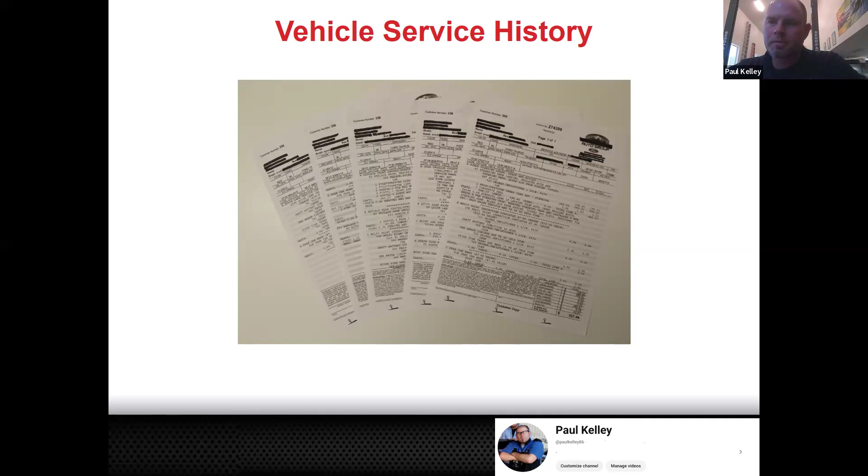Additionally, recalls are coming up right here, so I'll throw a recall point in. If you're bringing your car to the independent shop, the mobile mechanic, or doing it yourself, nobody's running that VIN number for recalls. But if you're bringing it to the dealership and there's a new recall, every time the car rolls through the service drive, the service advisor goes out and writes the VIN down.

They pull it up in dealer daily or service lane, and anything that applies to that vehicle as far as a recall or a campaign is going to pop up, and they're going to say, hey, while you're here, would you like to take care of this recall? You don't have to wait to get it in the mail, especially when you buy a car used. A lot of times that recall notice may go to the original owner, and people may be driving around with some safety related issue and not even know about it.

So this is all really positive reasons to stick with the dealership, because they're going to record all this stuff. They have access to this. Let's say you bring it to the dealership and they find that your oil pan is leaking.

Well, Jiffy Lube, Valvoline, no offense, you guys, I'm just going to keep picking on them, but I'm not picking on you, I'm picking on them, you know what I'm saying? Not us, it's them, those people at the Jiffy Lube and the Valvolines. But if they see that oil pan leaking, good chance they're just gonna be like, I don't know, we don't do oil pans here, and they're just gonna let it roll.

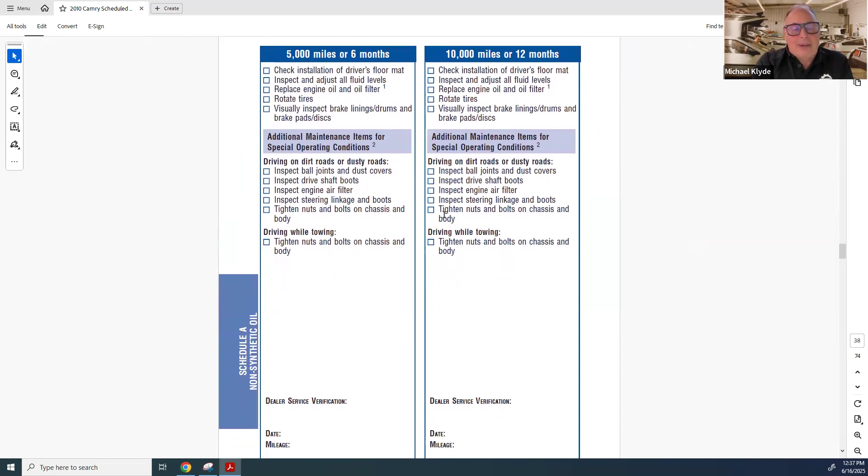So it tells you what you're supposed to do. In theory, at the dealer, you should be checking this off for a customer if this is in their glove box. So telling you as students that are going to be doing this at work on Toyotas or Lexus vehicles, if this book is in the glove box, then for that particular mileage, fill this out for the customer and leave it on the center console or passenger seat with a note saying, I filled this out for you, thank you for coming in to have your vehicle serviced at Anaheim Toyota or wherever you're working.

And that, I tell you what, if you want a customer to come back, fill this out and leave a little note in it and sign it, and I guarantee you that you're going to increase the chances of them coming back to get work done at your store by 100%.

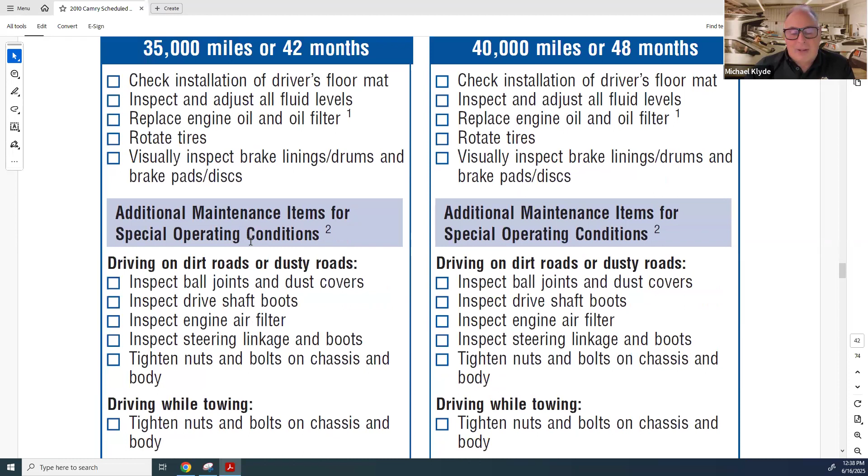Okay, yeah, they like this. The only thing I've heard is some customers don't want you going through their glove compartment. I think it's an amazing idea, but I'd check with the manager and ask, do I have access to, for example, the wheel lock that's in the glove compartment? A lot of dealers don't want you even looking for that, so they have the master set.

So anybody who's working, can you guys say if your dealer will have you go in the glove box, or if your dealer says don't even touch any personal stuff? Anybody got any feedback? Now's a good time.

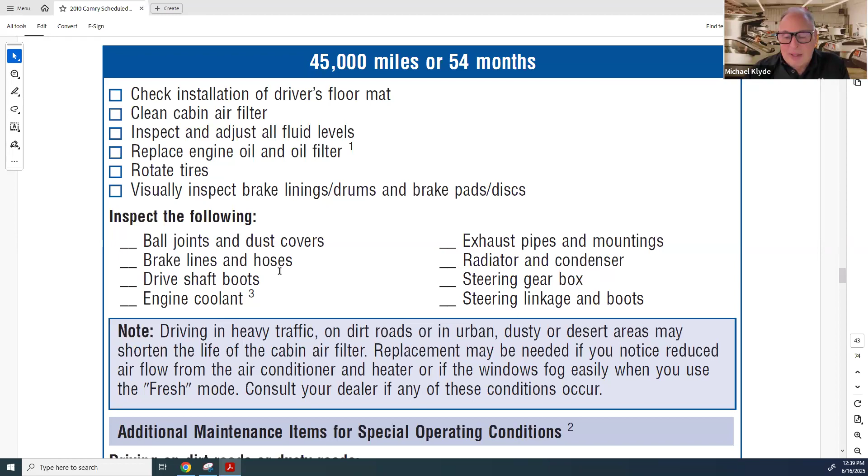And if your dealer does say that, you can always ask if you have a particular service advisor that does most of the maintenance write-ups. You can let them know on the days you're working, hey, remember I'm working today, so can you try to find the maintenance booklet out of the glove box with the customer so I can fill it out for them? Let them know why you're doing it, and that's going to increase the chances of them coming back for service, which is money in their pocket too.

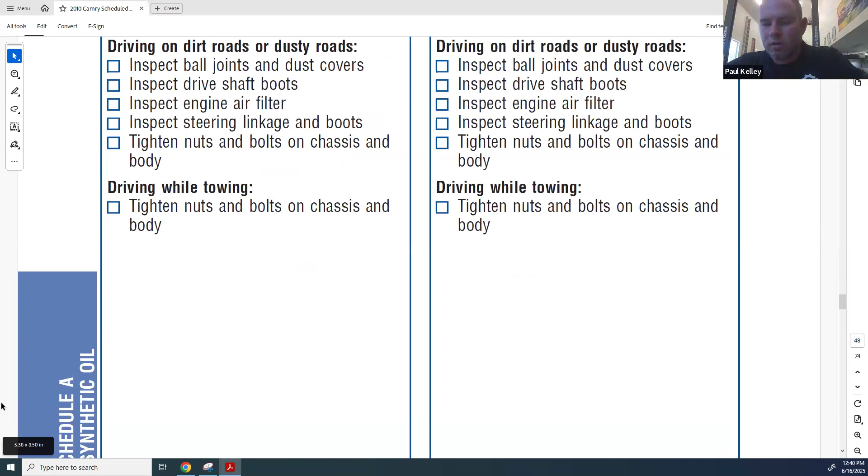Yeah, at Toyota downtown LA, the service advisor asked the customer to leave the lock right there, like in the cup holder, somewhere visible for us to see. So you could use that, say, if you want me to fill this out, leave the owner's manual too.

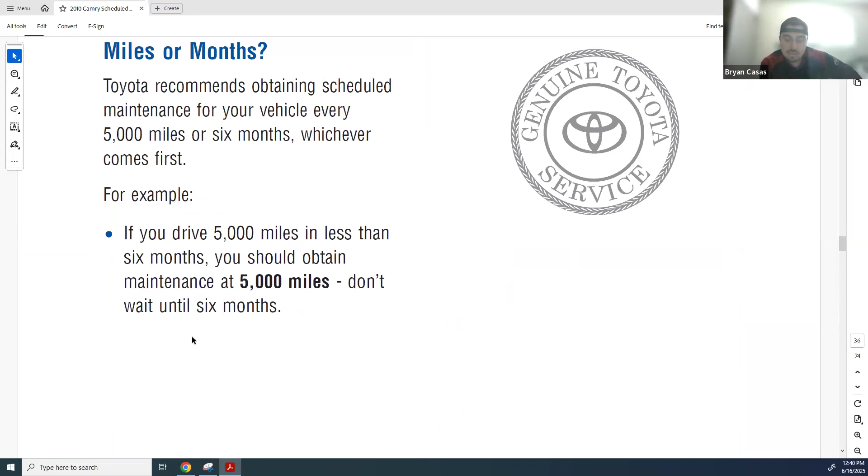Yeah, they could do that too. Because at our dealership, they're having us check all the spare tires as well, so the advisors are supposed to be asking for permission on that. But for the most part, we all have a master set. I have an aftermarket set too, but they don't really want us to use that so much, just because there could be issues, or some lug nuts have all locks and it takes more time.

Well understood. So you guys, right now I think is actually a pretty good moment to take a look at this. This is something that I pulled from TIS. It could be a little bit hard to find. Sometimes it's under reference information, sometimes it's under owner's manual. It could be its own standalone maintenance manual. Especially if it's a special model, like let's say the GR model, they might even have a supplemental book, because the GR Corolla has different maintenance intervals than the regular Corolla.

But ultimately, part of the point of today is how we do business professionally, right? Service information, we don't make stuff up. So if someone says, hey, you're a mechanic, how often should I change my oil, your answer shouldn't really be your opinion. Your opinions are amazing and you could probably mostly keep them to yourself because nobody cares. However, what we have to reference is this manual, right?

So this was for an older one. This is a 2010 Camry. If I skim to the bottom, I couldn't tell if this was a V6 — I think this is for the V6. It can be different if it's a 4-cylinder or a six, right? At 5,000 miles or 6 months. So this is the first service.

Check installation of driver's floor mat. Anybody know anything about that? There's a reason that's in there. Y'all heard anything about floor mats? Maybe the cost of a lawsuit? So it doesn't get stuck on the gas pedal? Yeah, that's what it is.

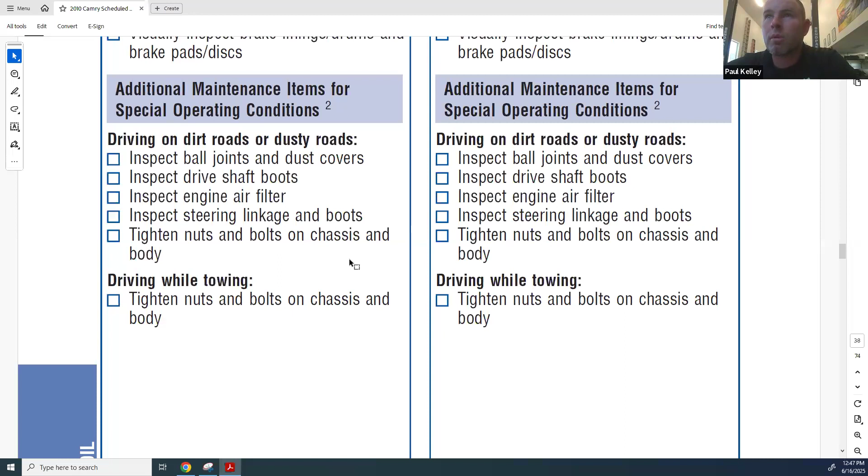And then I wanted to make a note on this: inspect the engine air filter. So at 5,000 miles, you think the air filter's dirty? Anybody ever seen an air filter dirty at 5,000?

No, but look, it does say special operating conditions with it too. So let's see what that is. I could dig it out. I think it was at the top, or the bottom, but a lot of times the asterisk is for dirt roads or severe service. So if you're doing dirt roads and stuff, maybe that air filter would be dirty. But for the normal, typical Orange County or LA person, you're probably not going to find a dirty air filter at 5,000. However, what if a rodent made a nest in there, and that rodent's nest ends up chewing through the air filter and damaging the mass airflow sensor?

And they say, hey, I just had the oil changed a week ago. The technician didn't notice this, and you'd be like, well, it's only 5,000 miles, I didn't check it. So be careful about being complacent in predicting, right? Because if you're working on your own car, you only work on one car. But if you're working for the dealership, you're working on 10, 12 cars a day, sometimes more. These 1% chances mean 1 in 100 cars can have it, and you'll work on 100 cars in the next 2 weeks, so you've got to be aware.

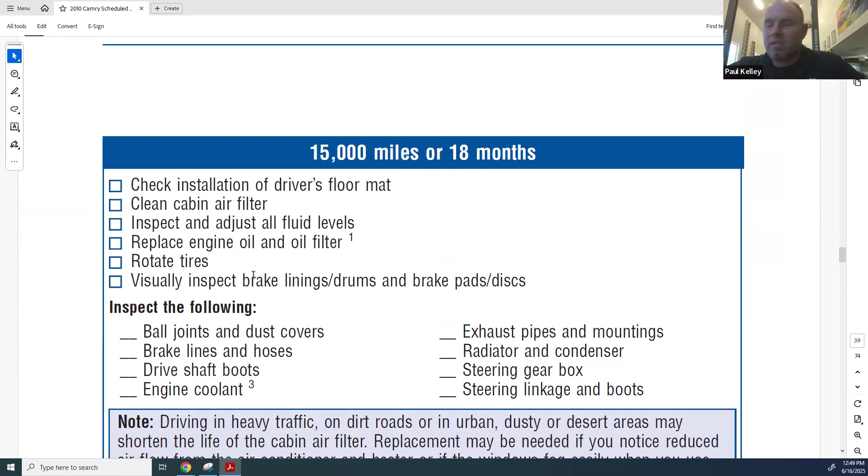You might really want to cross those T's and dot those I's and make sure we do all these steps, because if anybody comes asking, I'm not going to lie to them. And if I say, yes, I was supposed to check that, but no, I didn't, I'm kind of messing up, right? Now, if they say, why didn't you check it, and your answer was, well, the shop foreman said we had too many cars and to hurry it up, and I asked him, I'll work as fast as I can, but if you want it done faster than as fast as I can do it, what do you want me to do? And they say, well, just stop checking the air filter at 5,000 miles. Then you'd be like, hey, I'm an employee, the foreman told me not to check the air filters unless it's 15,000. Then it's kind of on them. So sometimes that stuff happens in the dealership. Like to say it doesn't, right?

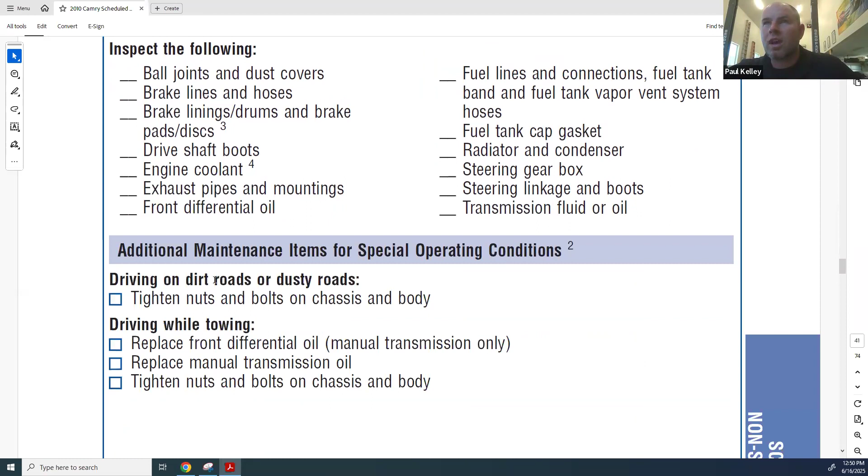But let's just skip forward to a more major service, like 30,000 miles. They're saying the same things, but replace the engine air filter. So it's almost the same. Then it also specifies inspect the coolant, inspect a lot of connections and things. Oh, there you go - if you're driving on dirt roads or dusty roads, or driving and towing, it actually calls to replace the front differential oil on the Camry.

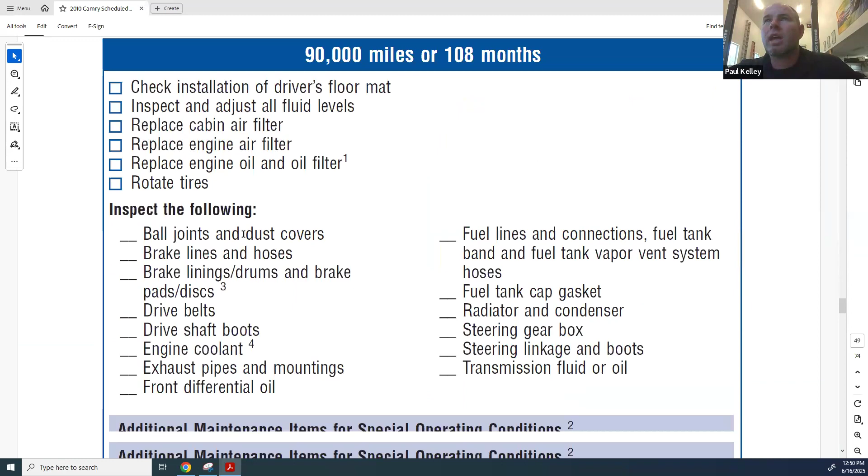So depending on what conditions you're in, let's say we jump down to about 60K. At 60, it looks pretty much the same as 30. Let's say that we jump down to 90,000 - oh, looks pretty similar to 30. And I'm a little surprised because usually they're calling for that coolant here pretty soon, maybe at 100. 100,000 miles - oh, look at that, replace the engine coolant at 100.

So like I was saying about your opinions, you are just very special, you are one of a kind. But if a customer says, hey, when should I replace my coolant, my answer would be, well, I'm going to look it up in service information, I'm going to see when the manufacturer recommends it. Make sense? So as technicians, we mostly execute what the manufacturer recommendation is. If they ask how tight a bolt is, or when something should be done, that's not really our role. Our role is to be able to source this information. So you're going to notice over the course of the next month, we're going to be referencing information, not thinking about it and making it up so much, but referencing the information. In this case, it calls for coolant at 100,000 miles or 120 months. That's when the coolant gets done.

Now, you did notice, though, up here, it was saying to inspect the coolant. If we perform an inspection on the coolant - freeze protection, pH - and there's a defect with the coolant, then we can do it early, but we don't do it early because the coolant's on sale, we don't do it early because we wanted to make extra money, you know what I mean? There needs to be a standard, and the standard is if there's a defect, by all means, but you need to say what you did to determine the defect, or the manufacturer recommends it at X, Y, and Z miles and months.

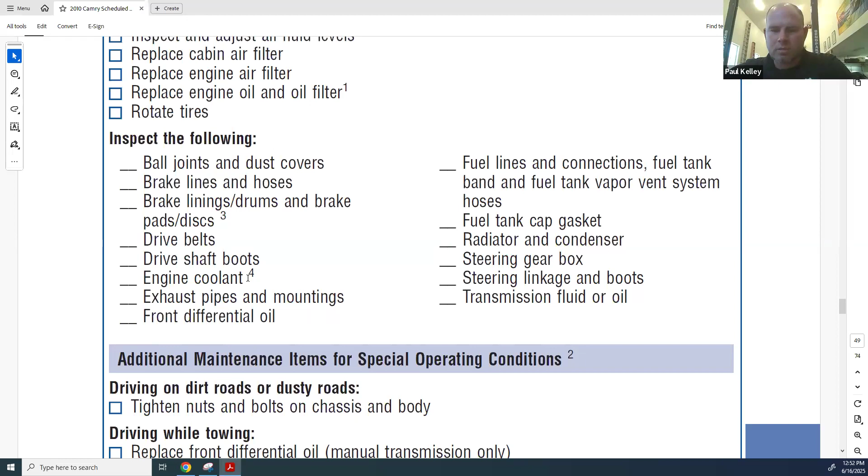Great, perfect. Okay, so you could look through a lot of this. A lot of times spark plugs are around 120 or so, or sometimes around 100. Yeah, there you go - spark plugs at 120. So those iridium spark plugs, they last a long time.

It's not like back in the day, you'd bring the car in every year or two and they'd say, oh, it's time for a tune-up, you need new spark plugs. If you take it to an independent shop and the car's 3 years old with 36,000 miles and they're telling you need spark plugs, I'd be like, hold up. On a new car, I don't think so. See what I'm saying? So they call for replacing the spark plugs.

And as a side note, if you dig further into service info, anybody ever heard of gapping spark plugs? Yeah, you won't find information on how to gap these because they're iridium coated. And if you try to slide the gapping tool in, a lot of times it'll scrape the thin layer of iridium out. So we don't pull the spark plugs at 30 and clean them up and re-gap them and stuff. Like that's old school. Those were cool days, but you got to be as current as whatever year the car you're working on is.

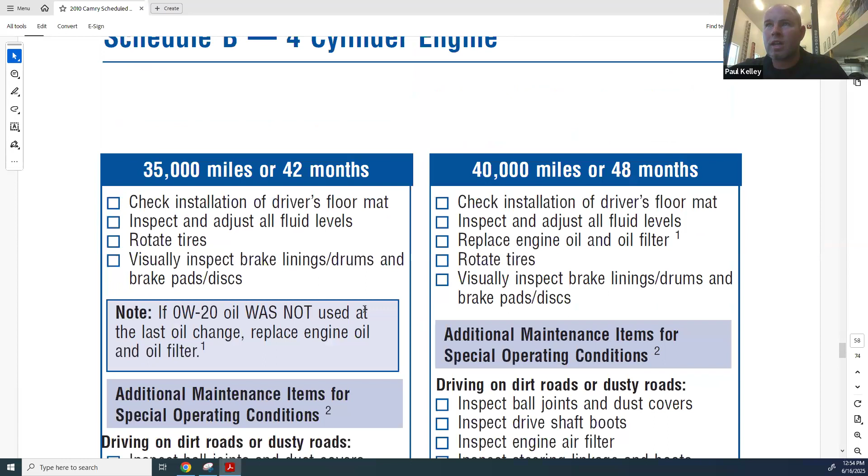Make sense? So that was a good, quick overview of the maintenance manual. Again, you can find this on service info, or probably as part of one of the next things we cover, the MPI. The MPI should a lot of times have that stuff built in.

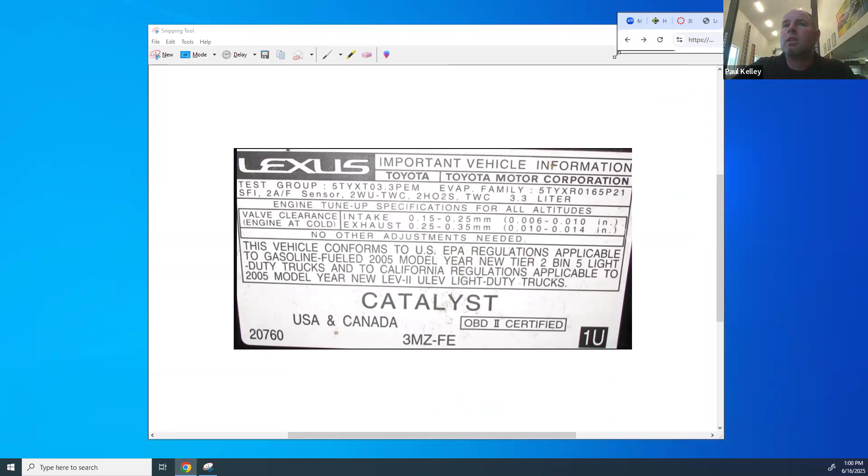There's like a little X right above the pin. Oh, you know, the problem is my second screen makes it just a little too big, so I've got to make it smaller so I can see it. There it is - yeah, that was really easy, except I couldn't see it. Okay, so fail right there. How about...

Maintenance? Now it's showing you the maintenance - alignment, drive belt, filters, fluids. Maybe we'll consider fluids, and I'm going to say probably fluids. Cool, engine oil - there we go. Here we go. You could do parts and labor, and it's going to tell you what it pays, which is going to be not much. You could do procedures, which is actually going to walk you through it.

So your first lesson is, when you go to do a job, if you don't know how to do a job and you're a DIY person, you jump on YouTube or ask grandpa or whatever. If you're a professional technician, you should have access to a paid subscription, right? You don't have ALLDATA - I have ALLDATA. You can have it at the school because the school has a subscription, but it only works while you're at the school because it's based on IP address. So this is actually an account that I can use from home, but it's only for me, not for you.

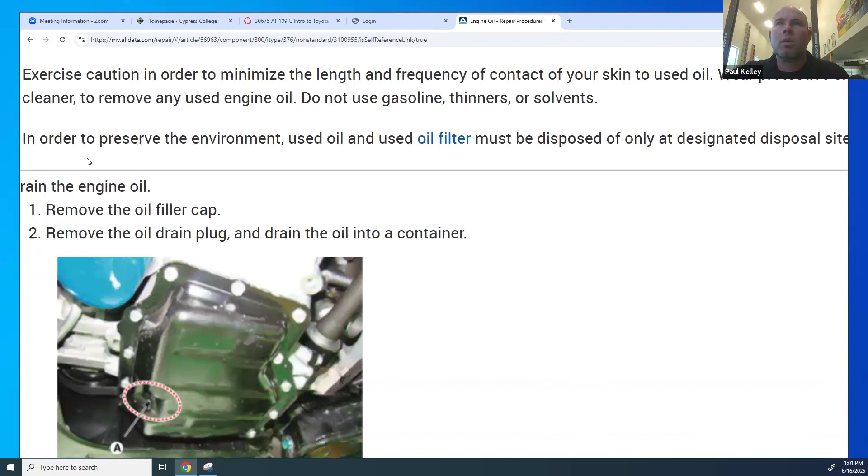So when you go to do a job, you can be like, hey, look at this, I got some information - like, for example, prolonged contact with engine oil will give you cancer and you'll die. All right, but then we get into more important stuff. Here's how you drain the oil: remove the filler cap, remove the drain plug, drain the oil into a container, remove the oil filter with special service tool 09263-2E000 and blah, blah, blah, blah, blah, the wrench.

Okay, so that's the cup filter. One thing right off the bat, initial impressions - if you go to do this job and you're like, 'Hi, I can't change your oil because I don't have SST 09263-2E000,' like, you don't want to get in the habit of saying you can't, right? Do you have a universal oil filter cup or an oil filter strap wrench or any way you can do the job? Because if you do, that's what you should do. You should get it done - you can't just not get it done and mess it up.

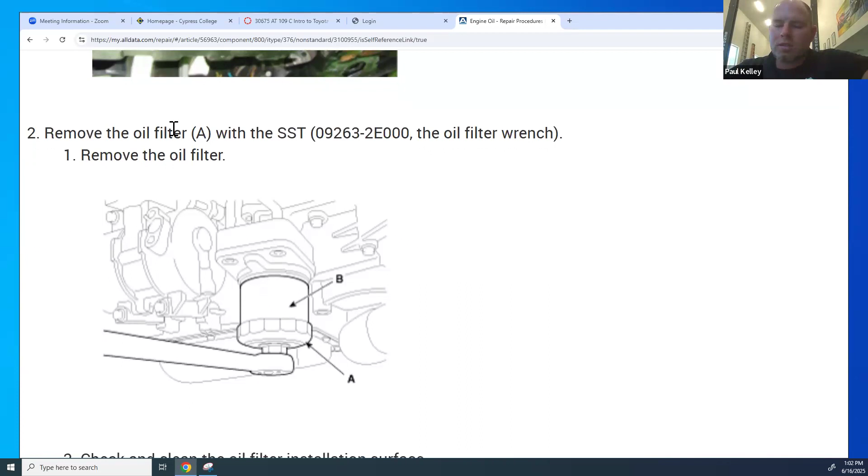But if you can use a universal tool - like I have some random oil filter stuff over here, we'll be doing oil changes later - but right, per the service information, it's saying you need this special tool. So that can be a bit of a pain, right? Make sure it's clean, check the part number, make sure it's the same. Apply clean engine oil to the gasket, lightly screw the oil filter into place, tighten until the gasket makes contact seat, tighten with the torque below.

8.7 to 11.6 foot-pounds, right, so that's the matter of fact. Now if you've done 1,000 oil changes and you're just like, you know what, I just do hand tight, cool. But your hand tight is different than my hand tight, is different than anybody's hand tight. So when we follow the service information, we're doing it to a standard, right? That gives us the standard, and then we deliver to the standard.

Cool, so let's just say you get hauled off into court someday and they're like, Hugo, on or about June 16th at 1:03 p.m., did you perform this oil change? And you're like, yes. What did you torque the oil filter to? And you're like, I just tightened it as much as I could. I tightened it tight, tight, tight, and two tights broke. Guden tight, German torque specs. What you want, Ugadugas? I did 3 Ugadugas, 5 Tataras. Like, those are all bad answers.

A good answer would be, I referenced service information and I torqued it to 8.7 to 11.6 foot-pounds per the service manual. You don't have to remember it, right? But when we do this work, we're doing it to a documented standard.

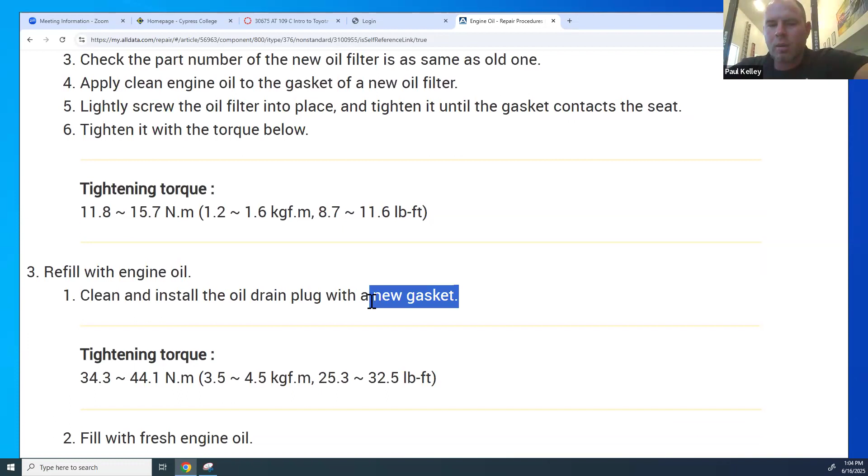And then it's going to say new oil drain plug with a new gasket, right? So again, I know there's 10 different ways to do the job, but if the service manual is calling for a new drain plug gasket, and calling for this torque, and calling for using clean engine oil to lubricate the gasket, and calling for this capacity, we want to reference the service manual. The service manual is checked for errors. If you reference Google, especially now that it's enhanced with AI, it messes some stuff up, dude. If we were to check that, I'm not even sure they'll get the right number, right?

So 4 points, that's liters. We don't read liters, we do gallons and quarts. 4.04 to 4.30 imperial quarts. Okay, if you were to do the oil pan alone, that's kind of interesting, 4.43 US quarts. Oh, I'm sorry, imperial quarts and US quarts are different? I never knew that. 4.86 to 5.17 US quarts.

Wow, that's trippy. Cool, and if you're going to do the oil filter, which is pretty much what you're going to do, right, you're going to do the oil change and the oil filter, 4.75 US quarts. And honestly, this is pretty good justification for why you should really check it after you're done, because I was confused right there and I think I'm unconfused, but there's always a chance I'm still confused. How do you know what you don't know, right? And that says check for leaks, recheck the oil level, right? Boom, and it's overall pretty straightforward after that.

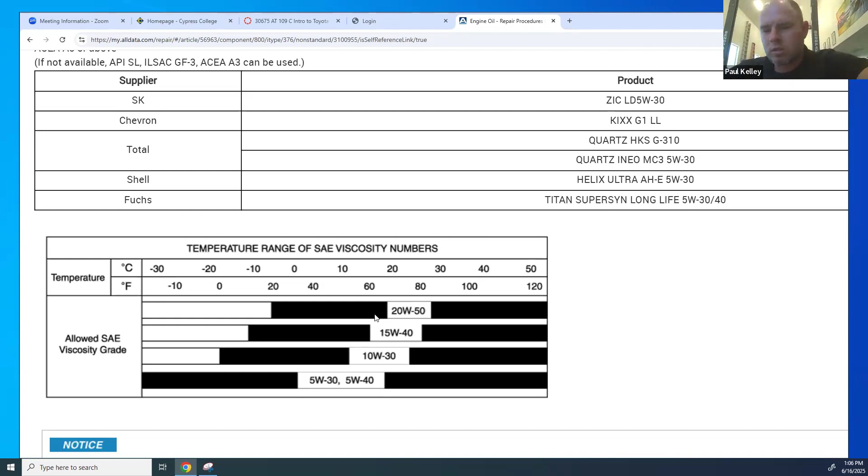This is actually a really cool chart, but I don't want to spend a lot of time on it. But later when we talk about oil changes, you'll see this. Which oil should you use? Well, 5W30 or 5W40 is good down to negative 10 Fahrenheit, all the way to 120. So that's good. But if you're not going to get below 20 degrees, you could technically run 20W50. Who said so? The oil guy, Project Farm on YouTube? Like, no. The service manual said so, right? That's going to hold up a lot better in court or whatever.

All right, cool. So I think we found one good example. How about we pick another one? Let's say we change the cars. I'm gonna pick this one because I can, and it's gonna be fun. And how about let's go with the 2025 Toyota.

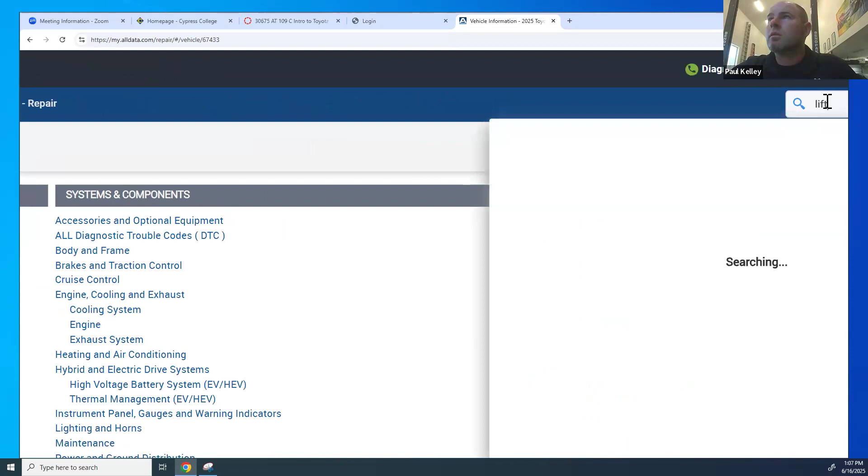Toyota. You want to look up how to do an oil change on a Tesla? That'd be fun. Let's go with a Tacoma. Oh, you know why I can't find it? Because when it's a Toyota truck, you got to put 'truck' on all that. It's kind of a pain. So let's just say we did Tacoma 4-wheel drive with non-hybrid. And let's say that we went after lift points. How about that? Right, you guys are going to be lifting cars later this week, so you know. Lift, I'll just put lift. There you go, that pulled up pretty easy. Vehicle lifting, or I could jump right in and just do vehicle lift and support locations.

So look at this document. All right, vehicle must be unloaded before jacking up the vehicle. Never jack up or raise a heavily loaded vehicle. So this is good because it's for a truck. Trucks can have any number of different things, junk in the trunk, if you will. All right, and then it talks about removing heavy components like engine, transmission, transaxle. The vehicle center of gravity will shift. Basically, predict.

If you have it pulled a little too far forward on the lift, or not far enough, it might be balanced when you pull the engine out, but then there's less weight in the front. It might actually be heavier in the back and tip off. You guys have seen some of these videos on YouTube, right? Like there's one with a Corvette, the guy's pulling the engine, and all of a sudden it pops a little wheelie, the lift arms swing out, and that thing blows fiberglass all over the place.

That was in the service manual when you were pulling the engine out. Hey, anticipate the center of gravity shift, right? Now it gives you precautions for the four posts, the jack and jack stands, etc. But I want you to remember what this document looks like, okay?

Look at that document. It's basically saying the center of gravity is 57.9 inches from that point right there. And it's saying if you want to jack it with a floor jack, this is where you put the jack. The center of gravity is that symbol right there. And by the way, if you want to jack the rear, this is the rear jacking point, right on the rear differential, right on the rear axle. That's pretty standard, these points, support position.

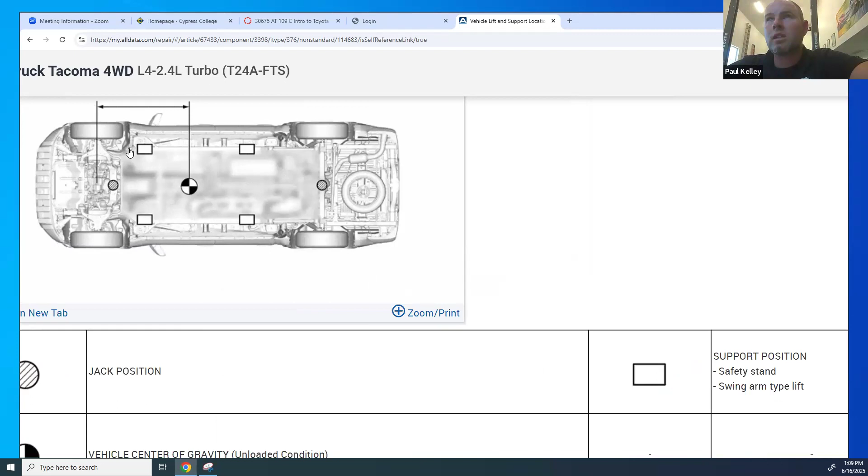Make sense? Now, when we go to pull it in, and some of you've done the lift and some of you haven't, you're going to be certified. You need to think about where the center of gravity is. This one actually shows you.

So we would want the post, this is like right where your butt is. So when you pull the car in, you want to look at your 2-post lift, and it should be lined up with your butt right there. You want that in the center.

Cool. This can be really tricky if it's like an MR2 or something, a Smart Car, some weird car. Typically, if it's a Camry or something front wheel drive, front engine, the center of gravity is like right by the mirrors or right around the steering wheel. And then for a truck, it's more like where your seat is, right around there.

Cool, and then it's saying, hey, use your swing arm type lift right here. Actually, they want your center of gravity ideally right here, but on most lifts you can't. So what it says, I'm familiar with this.

They will usually say you want this L measurement as small as possible. Position the vehicle so the center of gravity is centered on the lift. Length of L on the illustration should be as short as possible. So you know what the possible shortness is?

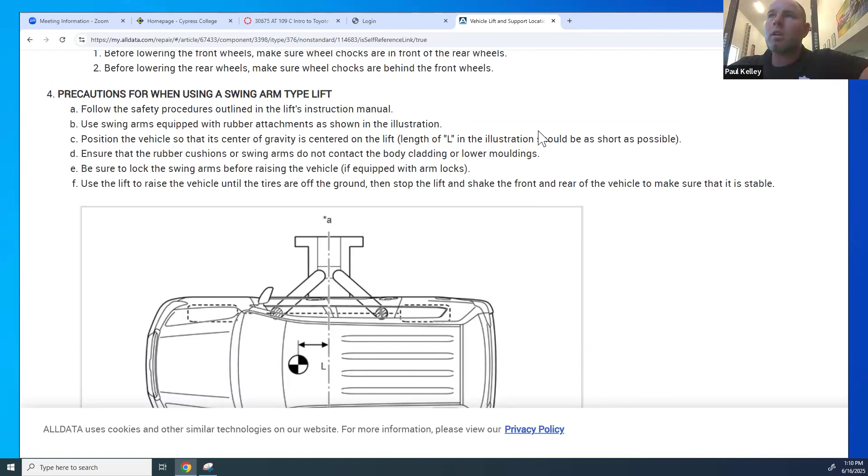Perfect in the middle. But a lot of times you can't, you'd have to back it up. And if you were to back it up, a lot of times these rear arms won't reach where you want to reach, and then your front arms might not even be able to swing in and get the lift point. So it's just saying you could be a little flexible on where you spot it, but you need to have this as short as possible. That's all it says, it doesn't give you a maximum number, right?

Now, how'd I know that? The service manual. The service manual said that, what rubber support pads to use, et cetera, et cetera. The shape of the lift and stuff makes a difference, right? So remember what those pictures look like, because we just found some pretty good information on ALLDATA.

And let's just say we wanted to do a tire rotation, and you want to look up the wheel torque. How about the wheel? Let's do lug nut.

And we don't want components, we don't want parts and labor, that's going to tell us prices and stuff. We want service and repair, but actually that didn't give us really great options.

So it's not, you know what? It could be a hub bolt. Yeah, they're probably calling it a hub bolt right there. This is saying actually how to replace the hub bolt, I believe.

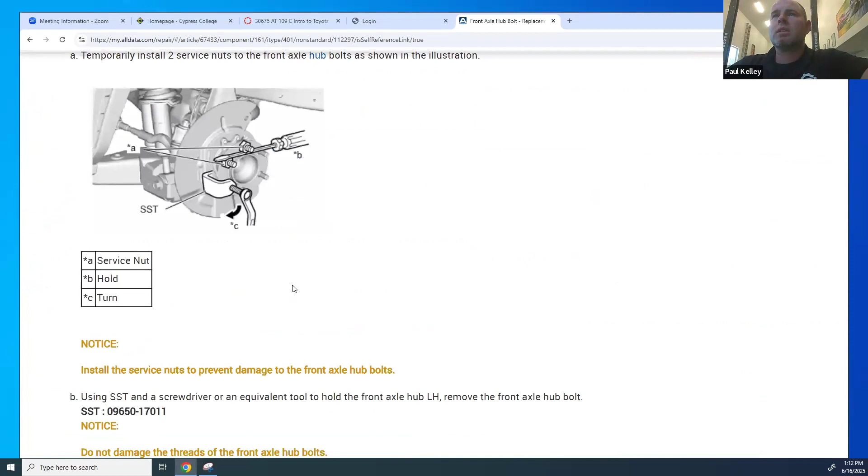Nah, this is way excessive. It's telling you how to do the stud, but all we really want is the lug nut torque. Sometimes it can be like a wild goose chase, and that's okay. How about we do wheel nut?

Come on, keyboard, don't be mean to me. Wheel nut a lot of times does find it. Tire and wheel removal will probably do it.

Okay, there's number one. Front axle, alright, quite a bit of information here. Definitely no torque spec that I saw. There was a tire and wheel installation. You're probably right, that makes a lot of sense. Alright, let's jump back in there, just like what you said. Installation would probably make a lot of sense.

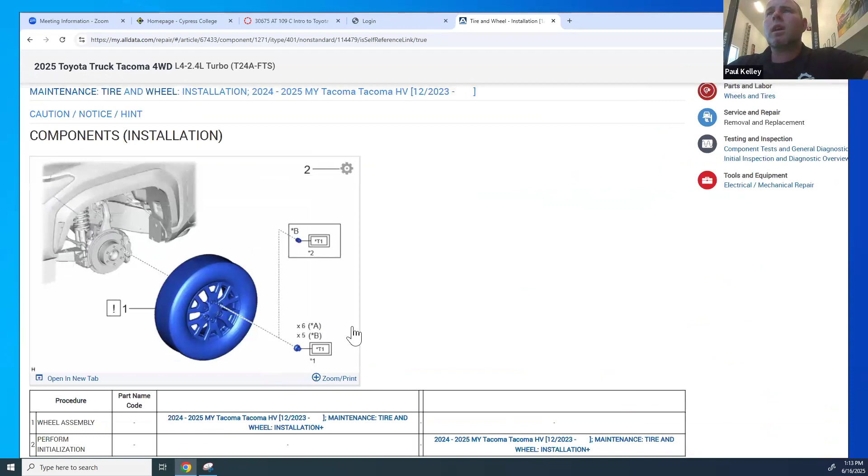And if you're wrong, you're fired. And I'm not fired yet. There we go, perfect, you got it. Alright, check it out.

It's saying for steel wheels, 154 foot-pounds, for alloy wheels, 97 foot-pounds. So I bet if you were to just Google this, they're probably not going to specify steel or alloy. Do you guys know how to tell the difference? You know the term steelies, black steel wheels? Those are steel wheels. Now they can be silver, black, or whatever, but they're steel. If you're not sure, bust out a magnet.

I got a magnet right there. Bust out a magnet, if the magnet sticks to it, it's ferrous, that's a steel wheel. Sometimes they've got a plastic hubcap over it. If it's got a plastic hubcap, you've got to take that off to do the work, right? But if it's an alloy, those are the nicer, fancier wheels, that's got a totally different torque spec. Alright, and we pulled that from ALLDATA.

ALLDATA has a bunch of information, but because this is Toyota class, we're going to jump right here. You guys are going to go onto the TIS system. You're going to spend a lot of time on there over the course of 2 years.

So for now, let's go with TIS users. You have a user ID and a password. You always have to click you've read and accepted. Part of the reason you're reading and accepting this is that this is information for Toyota technicians and similar, like Toyota students, not to be printing the whole service manual and posting it on the internet. That's basically what that's about.

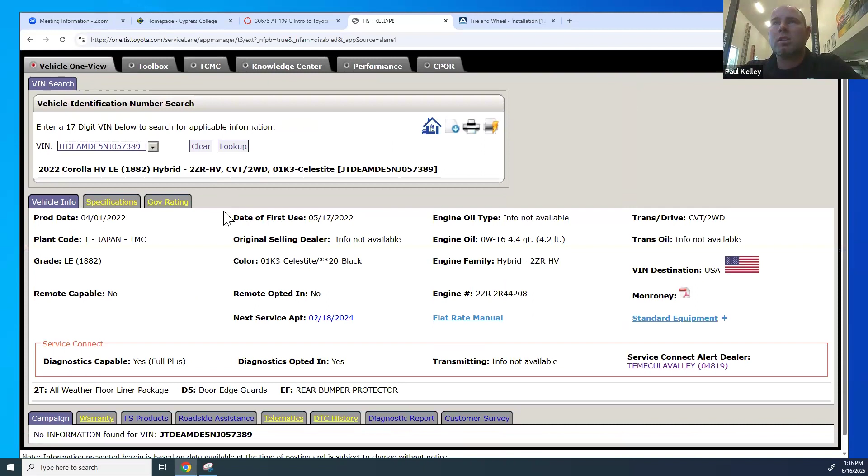That was fun. This is my in-laws' 2022 Corolla Hybrid. Alright, so this is kind of cool, we can see some information. Where was it built? Japan. Sometimes on TI, on it's not TechStream, chill, GTS Plus, it'll ask if it's like TMC or TMMK, so that's like US built or Japanese built, right? Tells you what grade it is. Tells you who the original selling dealer was.

And this is something I'm rarely in here, this is not normally where the technician works, but it's an interesting one. So if I were to click on campaign, no information, warranty, I can get the warranty status. The basic warranty, oh, not eligible. Aux battery, no. Wheel alignment and balancing, that's only good for 12 months, 12,000 miles, so you know. So if you have a car and it needs some sort of adjustment, that's like a 1-year warranty. So everything is not always covered.

However, look at this, California emissions warranty. Yeah, the long-term and the specific components such as the CAT, that's still covered. I believe that's like 100,000, or sometimes 120, or sometimes even higher. Additionally, if you fail emissions inspection, it's covered for 36 months or 50,000 miles. But if there are specific components such as the CAT, that's 96 months or 80,000 miles, I think the CAT might even be longer. Powertrain and restraint is 60 months, 60,000 miles.

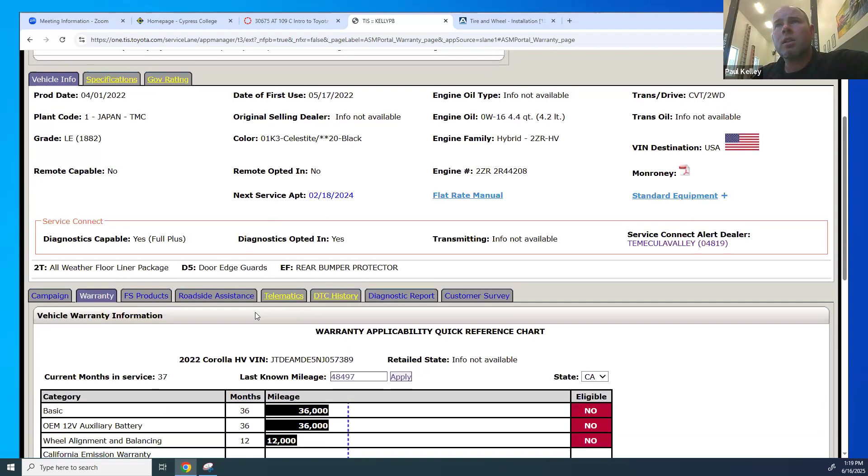So I was thinking I can look at - I thought I'd be able to see the history. I was pretty sure I could. I'm not exactly sure why I can't.

I can look at the DTC history here. Oh, that's right, I plugged this one in at the scan tool - that was where the last known mileage was. I don't even remember what we did on it.

Cypress College, right there, there we are. So you can even see, oh, this had some codes back when it was at the dealership and the miles were 4. So now you guys should know, every time we plug in the scan tool, it uploads a report of what codes were set. I'm looking at these codes, a bunch of U codes - so there's communication and network codes. It's probably because the battery was dead when it was sitting in transport and they probably had to charge the battery. So some of that made some sense.

I believe there is probably a way to look more into history, but a lot of the history you'll do for your dealership is through the service programs like CDK, Reynolds, Tekion, something like that - that's where you'll see the service history. So this one's just a little different.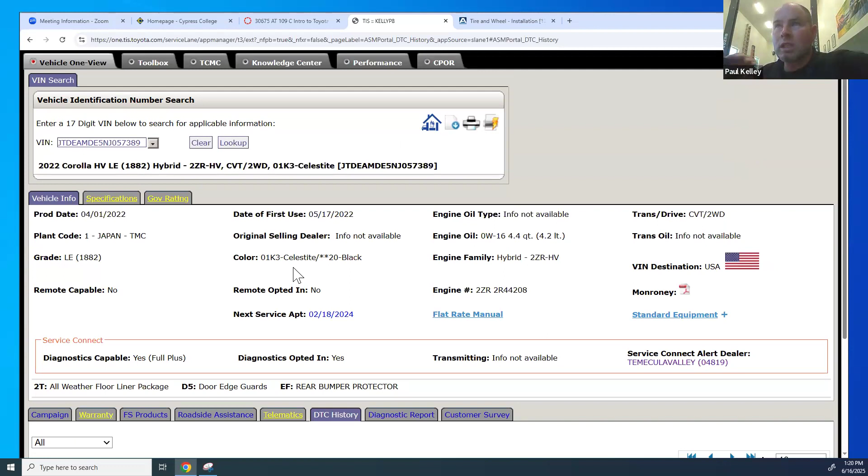Let's just stick with this one for a bit. Let's say that we wanted to jump into TIS right here. Well, it blew that car out - that's okay, we'll start with that Tacoma. Remember how we were working on the Tacoma, right? I think it was 2025 that we picked. We'll just run it like this. So now I'm going into TIS.

This is the real service manual - cool, but you got to see a little bit of service lane first. So if we go into the actual service manual for that Tacoma, what I want to do is a keyword search. Remember how we were looking for the wheel, the lug nut? I'm going to search wheel nut.

Okay, and this is going to pull up different categories right here. So we could do quick training guides, repair manual, electrical wiring diagram, new car features - which is sort of like an overview, we'll come back to that one - campaigns, accessories. Let's skip tech tip, Mexican tech tip, service bulletin, let's skip Mexican service bulletin, Canadian service bulletin, let's skip quick training guides. Let's do repair manual - that's where we're going to do the bulk of our work.

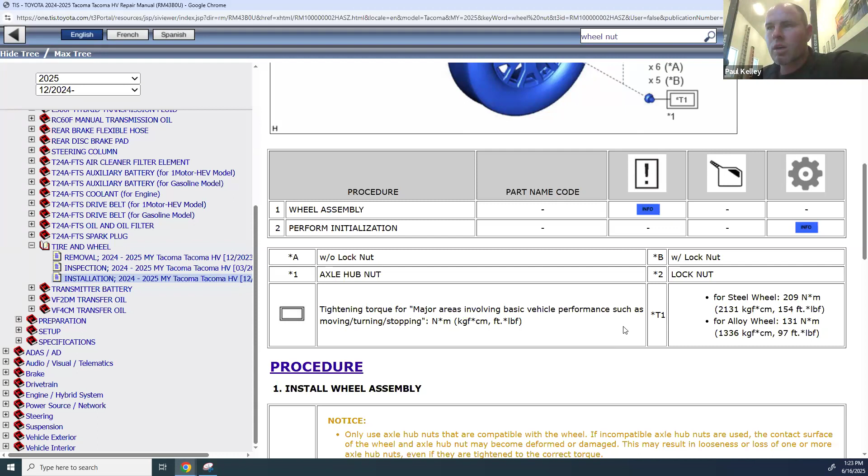Wait a minute, does that picture look familiar? That looks so familiar to me. Why is it so familiar? It's the exact same thing from All Data. Bingo - so you want to know the reason why: Toyota sells the information to All Data, and All Data puts it up on their site. They regurgitate it, and then they sell it to subscribers - to shops and facilities, maintenance, repair, whoever needs to do the work subscribes to All Data for $600 a year or something, and they get that information. You get it right from Toyota, but probably it's going to be the same info.

But All Data does not have all this. All Data has lug nuts and a lot of stuff, their wiring diagrams are decent. They don't do some of the functions and features though, but ultimately you're still referencing the service manual.

Make sense? You can see the lug nut torque for steel wheel, for alloy wheel, that's all the same. Let's just say we were to do the lift. How about that? We could probably pick it out through here.

But the problem is, to be honest with you, I don't really remember where that's going to be at. Lift points, usually the keyword search is a big help. So I'm going to X out of that second window and just search lift point, which I've searched before.

If I go down here, again, it's going to be down in the repair manual. Ooh, a lot of driver assist, ADAS type of stuff. So how about lift, let's say location.

Vehicle lift and support locations was a better search. Sometimes it's a wild goose chase, but you got to find it. All right, so here we go. Yeah, it gives us, wait a minute, look at these words, look at that picture, look at those specs. It's the identical stuff, right?

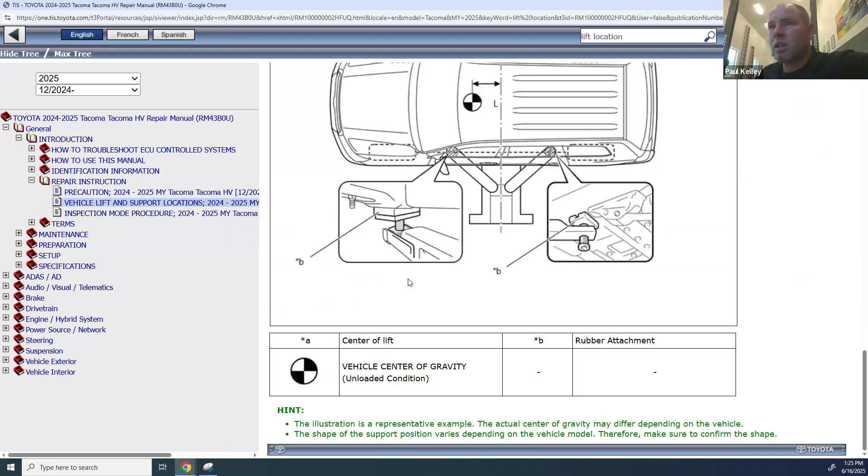So this week, when you guys are pulling cars in, now that you know how to pull them in, I guess we better test you on that. But now, and you're slow, but you were careful. So careful's good, let's get the speed up.

But once you get ready to lift the vehicles, now you'll know how to log in, look up the lift points, be able to reference the lift points, and we'll get a little bit more practice after you do your lift. If you haven't done it right, we'll give you some demonstrations. But you always want to, when you're new especially, you always want to look this up.

Now, once you've lifted 100 Tacomas, you probably don't really need to look this up anymore. But in class, we're going to have you look this up, lift it to the spec, check your lift points, make sure they're sitting where they're sitting. We'll give you some demos on this.

But is this kind of making sense? How we reference how to do it? It's not real tough, it's just you could be complacent.

So let's just say, for example, and this may be harder to find, but I'm gonna try. Let's go with how about a MR2? You know what I'm talking about? See, the problem is we'll just roll it, we'll just roll with any year.

Let's just see what we can find, because you may notice some things can be a little bit different. It's probably going to be in the repair manual. Let's say it's a 94 MR2.

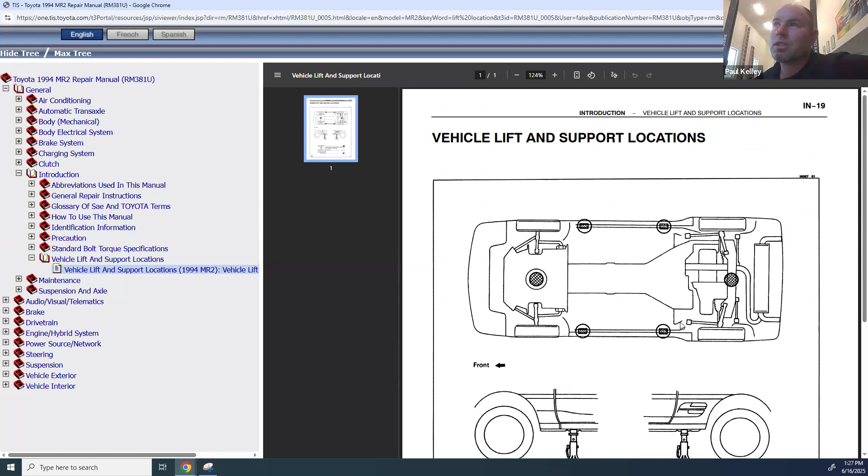So it's showing you the locations, jacking locations, jack stand locations, and you know what? It doesn't really show you a whole lot. So if I was lifting an MR2, I would be really careful because that thing's got a really unique center of gravity, and the older vehicles don't give you as much information.

So service manual has it, but the newer it is, the more the service manual has. Makes sense? This one's a good example of not great. And if you also look over here, it's got less things to look at, there's less categories because it's a more simple car.

If you look at it like this, that's it, because it's a 94. Cool, but it still has a lot of the specs. Whatever you need realistically will be there.

If we were to look at, how about a Scion IQ, yeah, that one would be tricky. That's a great idea, change it over to Scion, change it over to IQ.

We used to have one. We picked it up a few times, like just us, like the class. We just picked it up because we can, it was fun. Okay, let's search that one. Yeah, that one's an interesting one, I remember that. Yeah, this one should be good.

Ooh, and it's new enough. It gives you the precautions, tells you to use these rubber blocks on the pinch welds, which we have. They're not the Toyota rubber blocks, but they work great, and it's saying to use those. There's quite a bit of lessons on actually how to lift, so now we'll just focus on how we get the information.

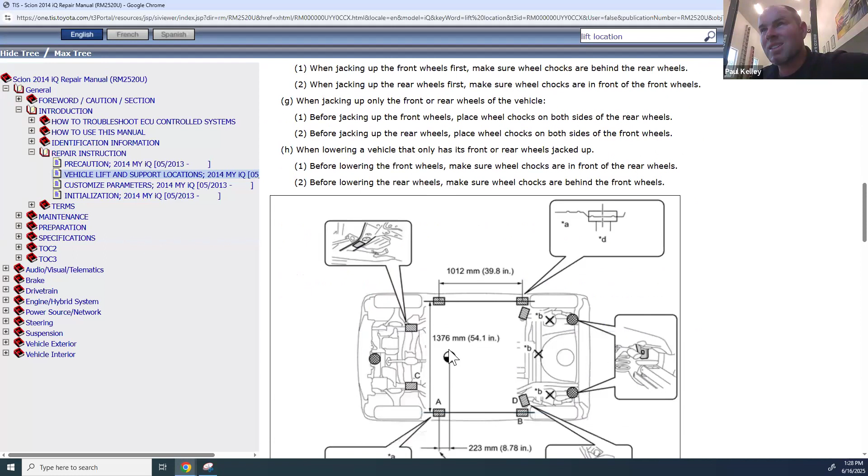Set the jack stands and lift points exactly under the specified locations. It's also giving you some specs here, like do it at this width. Here's the center of gravity, it should be only 8.78 inches off of that lift point. This one looks a little specific, and I think part of the reason why is because this car is actually pretty hard to lift.

I mean, just look at that thing. That's just sad right there. Took me like 10 minutes just to set it up. Yeah, difficult. And that's what it looks like right there. It's kind of embarrassing, but really good on gas.

The better version is actually the Aston Martin version. They've got an IQ, they call it something else just to help them meet their corporate average fuel economy.

All right, so there's some cool little examples. I'll give you a bit more of a brief overview, but the best way to really learn TIS is to do the big worksheet you guys will be doing this week, which you're going to love. So let's jump back into that. Now let's get out of that IQ, I just don't feel right about that. Let's make it a Lexus this time, let's make it an RC. Now let's do an LC, LC 500, we'll do a 2025.

So overall you get the car in, and maybe for example you want to know, they give you tech tips, which give you some tips on how to do your job. This is talking about the multimedia recorder. How about service bulletins?

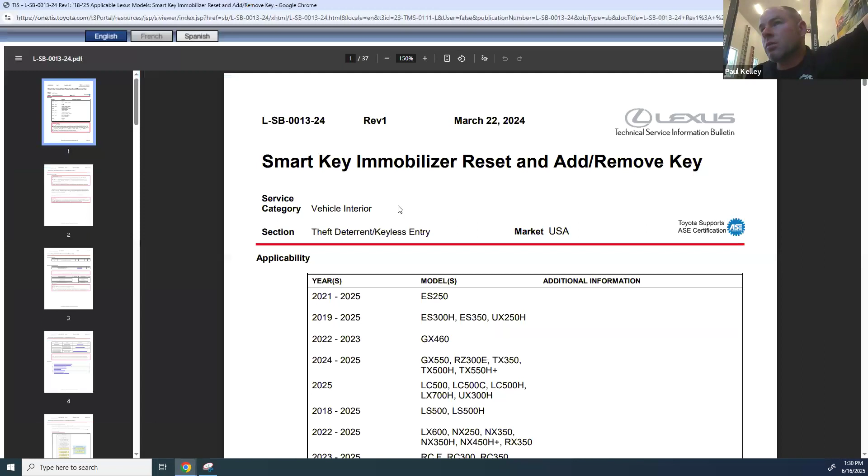Let's go with it's giving you a TSB, how to add or remove a key. So there's a TSB on this. I don't know what the actual concern is, it might just be an update to the procedure. Applicability has been updated to include 2025. There was a previous TSB that should be discarded, it supersedes these old ones, especially this LSB 0014-18. It's obsolete, get rid of it.

It's basically saying the immobilizer smart key reset is a feature that allows registration of new keys when all the master keys are lost. So this is an update to the service information to make sure technicians know how to do the procedure. Maybe it wasn't included very well in the original service manual, but you need this specific tool.

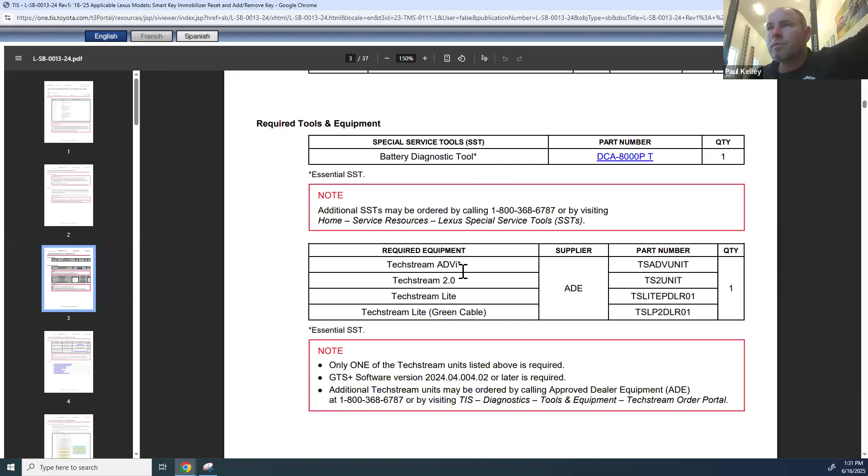You need the DCA battery diagnostic tool, you need the Techstream, you could be the ADVI, but it's going to be running GTS Plus. You can see it right here, it needs to have this software version or newer. It's basically saying how to do it, you can follow this — how, if they lost all keys, do you delete all keys? Click page 7, adding new keys.

24. Keys are lost or stolen, and request to remove any key not present.

So what that means is, let's say someone stole your keys, but you think they may be coming back for your car at a later date, like maybe it was some sort of domestic type of situation. You could bring it in and say, hey, I want all the keys wiped, and this is going to tell you how to do it. So this TSB is just going to give you the step by step on how to do anything and everything you may need to do on this.

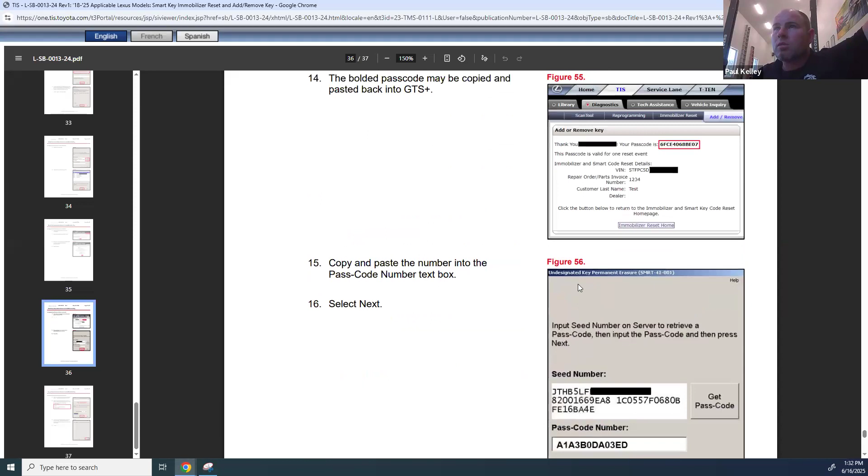Cool, so this is an example of a TSB. Probably not a great one, because you would have expected this to just be right in service information, but probably the reason is because some people are struggling, they must be running into some issues with this. A lot of times the TSB will also have a labor time.

So let's look for one that's a little nicer. To pull up just TSBs, I'm actually going to click right here, service bulletin, tech tip, and this will just be service bulletins right here. There's only 5 of them, that's pretty low, that's pretty impressive. Let's make it like a 2023 then. Ah, I know what it is, lift location, I have to delete that. All right, a lot more service bulletins now that I deleted the keyword search.

All right, how about — these are kind of basics. Let me just jump under here, it's still only 25, they don't have a ton of TSBs. Here's a cool one: if it has a film on it that appears to be brake dust.

Let me zoom in there.

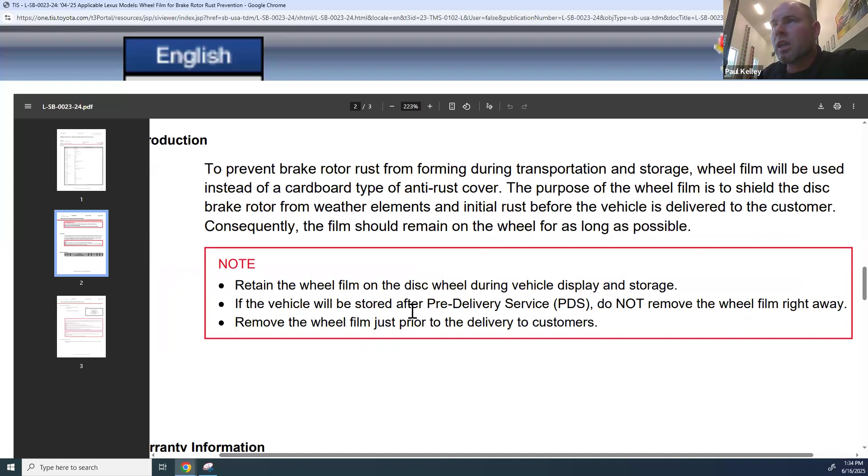All right, all the applicable models, which is just about everything. Okay, there's a new tech tip about the wheel film. It says to retain the wheel film on the disc during PDS - so don't remove it right away, remove it just prior to the customer. But there's no labor time on it, so it wasn't really a great one. I was really hoping for one that had a labor time on it. I might have to abandon the LC.

Yeah, probably not gonna be much on the LC. Let's go with the GX 460. Okay, some similar type of things, but more - there's some additional ones. No, that's Canada. Interesting. How many do we have? So there's only 27. I mean, that's actually pretty good.

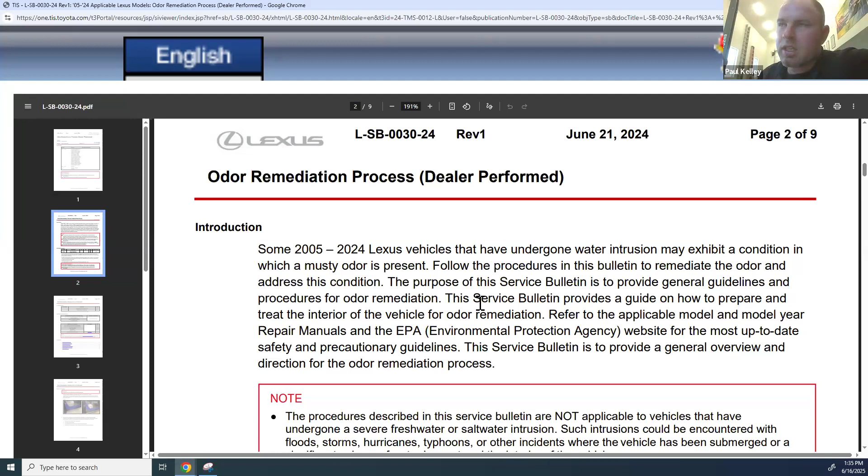The odor remediation process - that's good, I know about this one. It applies to a whole bunch of stuff. Some '05 to 2024 Lexus vehicles have undergone water intrusion and may exhibit a musty odor. So if you were to get in a car and the customer says it smells musty, moldy, nasty, you'd look for TSBs and find this one. It gives a guide on how to prepare to treat the interior for odor remediation. All right, look, there's an op code - we're going to come back to that. That's how the dealership gets paid, so you need to pull that op code.

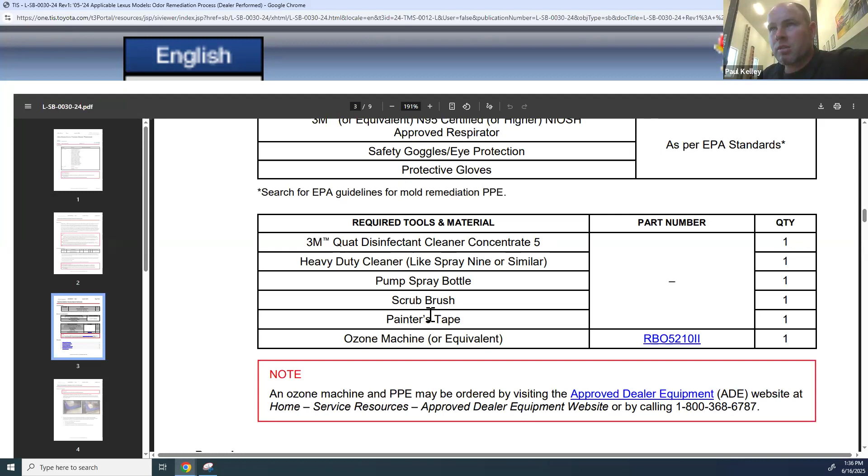How much should it take? Interesting, it's called Z time, so that means you can get paid for the amount of time you spent on it. So that one actually does have a time, it's just not a specific time. It's covered 48 months or 50,000 miles. It says to use the high performance charcoal filter insulator. We need a respirator, safety goggles, protective gloves, 3M quat disinfectant cleaner concentrate 5 - you need one of those - a heavy duty cleaner, a pump spray bottle, scrub brush, painter's tape, ozone machine or equivalent. There's the part number for the ozone machine, right? So you need to get all those tools, and then it's going to tell you exactly what to do and how to do it.

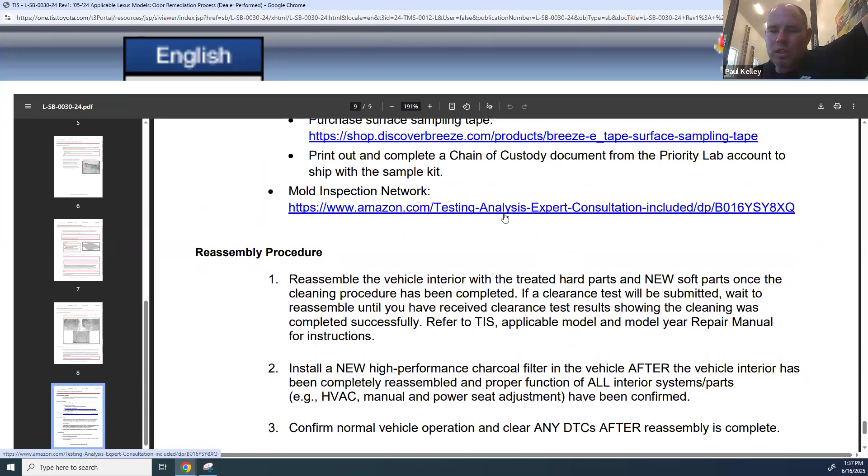Oh, if you're pulling the carpet, that's why it's Z time - that's going to be a big job right there. But it's just saying if you get it in and that's how it smells and it's under warranty, you don't need to really do an intense diagnosis, you just need to execute this service bulletin. And that looks a little ugly. Oh, and look at that mold inspection network - you can get it on Amazon. I've actually seen this before, it's like a petri dish. You put it in the car and give it an amount of time to see if mold grows, and then you'll know it's been good. Run the ozone machine, crank the AC up on recirculation, etc. So again, the TSB gives you the procedure that you're going to do, but it also gives you some numbers, the op code and the labor time, so you can get paid under warranty. Okay, so that was a good example of a TSB.

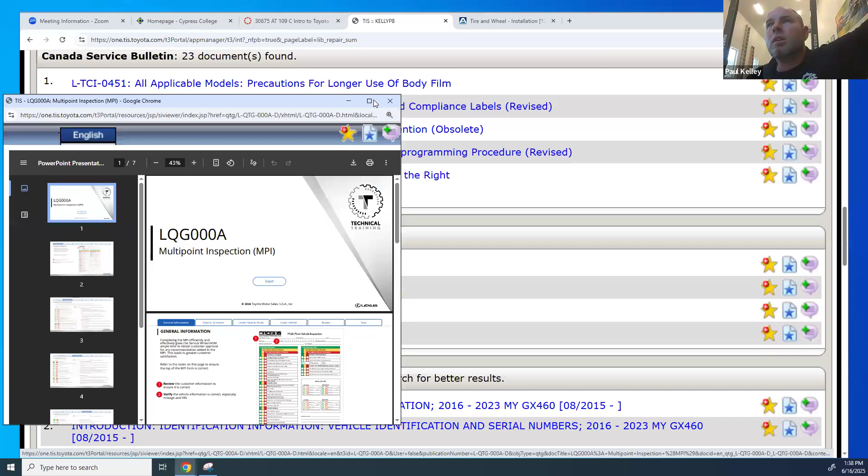Additionally, what else do we have here? We've also got quick training guides, so let's peek at that. A quick training guide, for example - I need to go back to the summary. You can see the quick training guide can be kind of cool. Like, hey, you want to do an MPI? Quick training guide, here's how you do it. It tells you do it like this, do it like that, do it like this. Okay, so a training guide is like a little instruction manual. It says check these, here's how you check it, check that, here's how you check it. Right, so a quick training guide can be really helpful - gives you information, it's training. Here's tire wear, abnormal wear, etc. A quick training guide is something you will all have access to.

And they have other ones too, like brake inspection and stuff like that. And then the repair manual, that's got the real bulk of the material. And then Mr. Clyde's favorite is the wiring diagram. So let's say we were to jump into electrical, which is your very next semester - the wiring diagram will give us anything we need to do with wiring. So it's basically giving us right here like an introduction: here's how it works, here's how to use it, here are the symbols, etc. - what the symbols mean, wire colors, connectors, information about the connector. A lot of information that's going to take you a while to cover next semester. Glossary of terms.

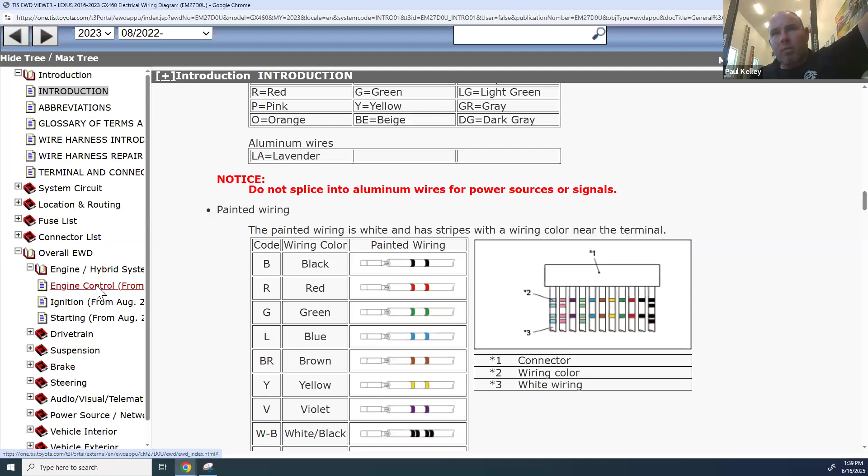How about instead we jump into overall EWD? Let's say we're working on the engine and hybrid system, and we're working on engine control. If you want to look into engine control, here you go. Here's the wiring diagram, the PDF version. So there's your multiple page wiring diagram.

If you wanted this wiring diagram usable, you can use the computer, but you could also print it and attach these together. That was actually not the one I was really looking for, but that's the PDF version. I was actually looking for something different, that was kind of weird.

Huh, that's interesting, that's not what I expected. So let me jump out of the GX. That was kind of a weird one to pick. Let's go with something more traditional.

Number one selling car in the United States, the Toyota Camry. Let's do like a 2024. Sometimes the newest ones might be missing something still, but it's probably got it by now. Let's go with the EWD, just jump under that. Let's do, how about engine control? A25A is the 4-cylinder, 2GR is the 6-cylinder.

That stuff comes with time. This is a little bit more normal. See how this is colored and modern and amazing? This makes a lot of sense.

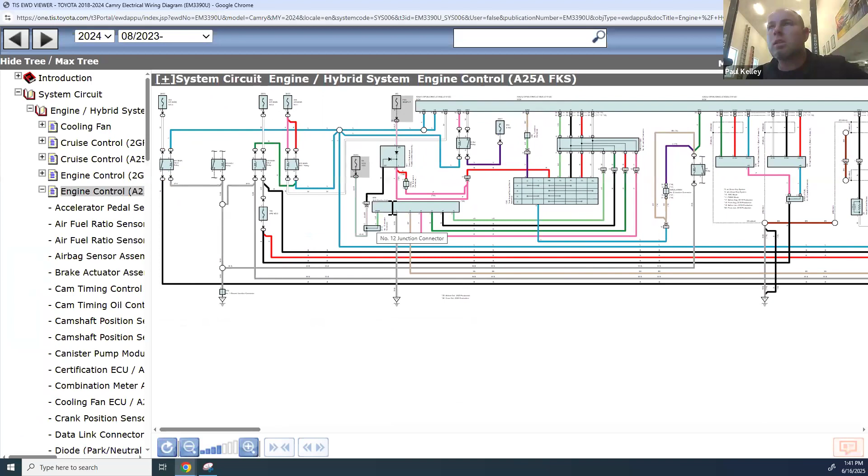Let's just say we're looking into... I'm tempted to go into that transmission stuff. Oh, here we go. Let's say we're trying to deal with something on the fuel injector assembly number 1. It's a direct injector, and we wanted to do some testing.

It shows you the color of the wire. It shows you the connectors. It shows you the actual injector, the terminal numbers. Again, the color. This is the same connector. CG2 is the same connector.

Let's say you want to know more about the connector. You click it, and then I usually get a pop-up box, but I think I have this expanded just a little too big, so that might make it a little tough. Unclick that. Come on, sweetheart, don't be like that. Okay, this one I can't expand it too much on my screen either.

Okay, so we'll jump right to where we were. We were looking at injectors. If I click on that injector, I can click this box and it'll give me the connector, here's the terminals, right? So you don't have to remember all this right now, but the point being, TIS is the service manual and it has all sorts of stuff: where the wiring is, where it goes, what the connector number is, et cetera.

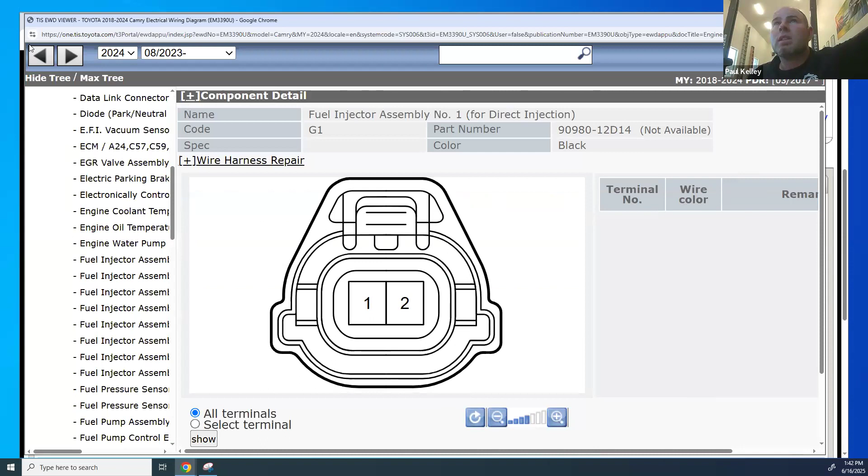If you wanted to know about this wire, let's click that wire. You click right here, it tells you all about where it's at. You can see where the fuse box is. You can see basically where the source of power comes from, et cetera. You can see tons of information in EWD.

So if you guys had a wiring issue or an electrical issue, where would you probably go? Electric wiring diagram, yeah, there you go. EWD, electrical wiring diagram. All right, what about this one?

New car features is like, when you're in school, you use the textbook and that gives you the basics. But when a new car comes out, the textbook isn't updated to the new car. This is almost like the book where you learn about the new features of the car.

So let's just say we were to look at, how about the model and lineup, model code and lineup. It even gives you, looks like it's going to break down the model code for us, what it means. Left-hand drive is L, I never knew that actually. That's interesting. So if you had an R, 1, 2, 3, 4, 5, 6, 7, the 7th digit of the model code was an R, that'd be right-hand drive.

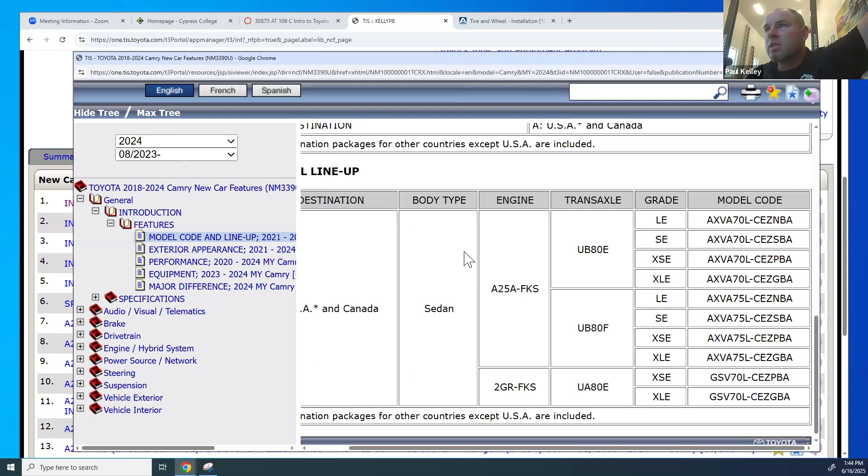Engine specs give you a lot of information like this. Also tells you if you have the LE, it's this model code. It comes with sedan, A25A is the 4-cylinder, UB80 is the transmission, but it's a UB80E. Let's say you got the XLE, you get the 2GR. That means the XLE comes with a V6, and the UA80, which is a beefed up version of the UB80 transmission, right? So that gives you a breakdown.

How about performance? Tells you all about the engine details, power output, RPM, the type of exhaust.

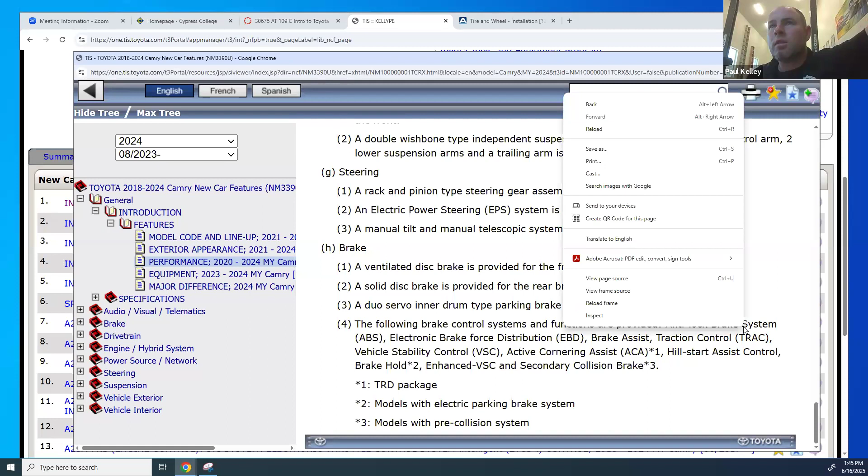A lot of details about the engine, specifically the 4-cylinder and 6-cylinder, gear ratios of the transmission. First gear is a 5.250 to 1, eighth gear is a 0.673 to 1. Lots of technical info. It's not exactly in the repair manual part, but it's in service info. And the new car features section is pretty cool. Let's say, for example, how about...

Front brakes? I don't know much about the front brakes on this. Overall, it tells you the brake type, wheel cylinder diameter, rotor size, pad material is D654H. If it's got the TRD package, you'll notice the wheel cylinder diameter is different. So the wheel cylinder diameter is the brake piston size. You've got 60.3 millimeters. Why do you only have 44.45 millimeters on the TRD? Don't you think it'd be bigger on the TRD package? But look, times two—so it's a two piston caliper, right? All this techie stuff, it's in here, it's just buried somewhere.

Or let's say you're more interested in the exterior, maybe the interior, whatever you want to know about, it'll tell you. So say you want to know about... nah, you don't care about that. How about the theft deterrent? You want to know about the engine immobilizer system—uses the ID code, it's registered. This will give you the whole prep on how the immobilizer system works.

Cool. So new car features is not where you pull specs, it's where you learn about the vehicle. So when you get a new model that comes out, new car features gives you the info. They also probably make an e-learning that you'll have to do to stay certified.

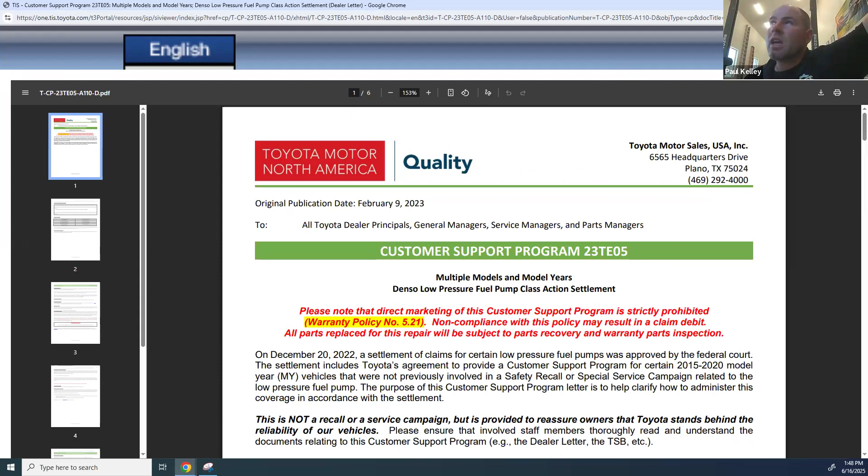There's a Denso low pressure fuel pump class action lawsuit. So that means it's not necessarily recalled, but it means like, hey, if you come in and complain about this, it will actually be covered because there's a class action lawsuit. It tells you a lot of details, tells you when—well, it looks like they did send the letters out. So it does look like they called these in, but it's still different than a recall because the government didn't get them—like NHTSA, National Highway Traffic Safety Administration, was not involved. This is Toyota saying, hey, we got an issue, we know about it, we'll send the letters out. Bring it back. Cool. So sometimes these are more basic and sometimes they're more technical.

This one, for example, is the ECU programming, and it applies to a bunch of different things. It's free of charge. They know that there's some issue, and it does look like they're also mailing out to the dealers. And then if we were to look at accessory—this is not original equipment, but this is like accessories.

If you got a roof rack or something, this will give you all the info for the roof rack. An ashtray, for example—I guess they still have those, haven't thought about that in a while. Crossbars, HomeLink, especially for opening your garage doors through the mirror, right? This is accessories.

And then last and kind of least for us is collision repair. So if the car's in the body shop, they can actually get specs and repair information.

Let's go with production date range—but I shouldn't have done that so quick. You saw right there, it said PDR. I had to pick PDR, production date range. I got to pop the door, look at the date—it's this date to this date. I pick it. This one I just made up.

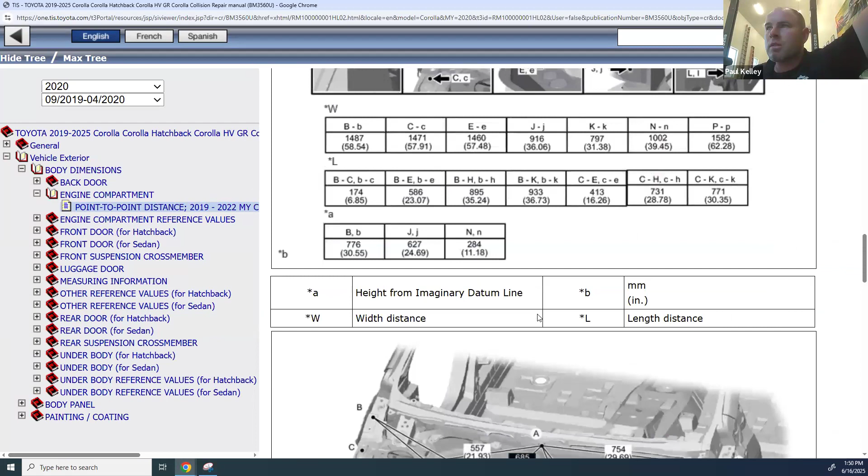But if you're going to do, let's say, exterior, body dimensions, engine compartment, point to point distances—body shops would use this. This is going to give us specs of all these dimensions. So if it's in a front end collision and it's crunched up, the service manual's got all sorts of measurements we can perform to make sure it's straight or straightened, so this is all stuff you wouldn't normally use, but you'll technically have access to when you get your TIS.

All squared away. Cool, so I skimmed that. Summary: we're good—service bulletin, tech tip, quick training guide, repair manual, electrical wiring diagram, new car features, service campaign, the accessory manual, and the collision repair. Those kind of make sense? Were those fun for you?

You guys got any questions about the basic overview of TIS? Because we're going to jump into something slightly different. How y'all feeling? Worn out already? Don't worry, when you get your lunch break, you're gonna feel rejuvenated.

All right, cool. So now you kind of know a little bit about service info. Let's jump back into where we were at. All right, so we finished here. Now let's talk about strategy-based diagnosis. This is something you're not really going to be doing in this class, however you all need to know how we handle business.

Sometimes cars come in for maintenance and we just do the maintenance that they say. Other times the car comes in because we called them for their maintenance and we don't do what they say, but we do what the service manual calls for. That would not apply. What we're about to cover right now, strategy-based diagnostics, would not really apply to maintenance. In fact, it doesn't even really apply to a lot of repairs, but commonly in our business, people come to us with problems.

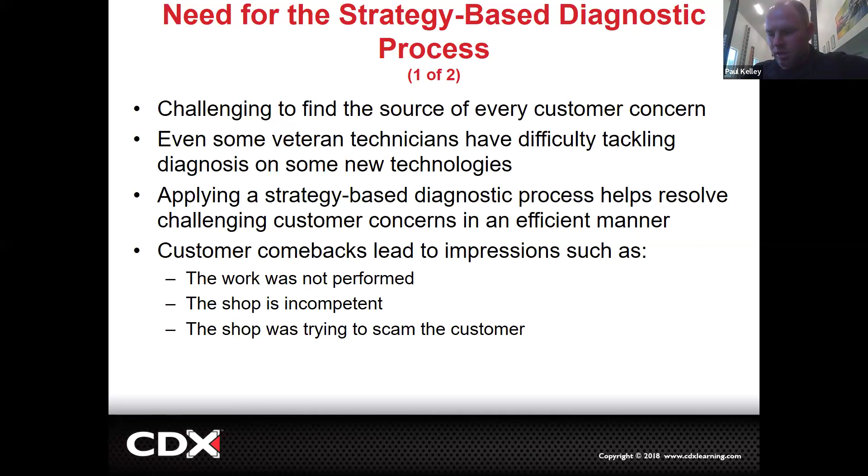But if you try to sell a power steering flush on a car that doesn't have hydraulic power steering - it's got electronic power steering - that'll end up in the news, on social media, everybody hears about it. But you fix a car right the first time and nobody knows. So unfortunately they're focused a lot of times on the negative. They may think that you're trying to scam them. That's just the way it is, sadly.

Now let's break it down. Verify the customer's concern - who can give me an example of how you would do that? You've got to make the problem up too.

They say their driving is wobbly. You can just drive the car and see that it's actually wobbly on the highway on the street. All right, so I'm going to reword it.

Customer states, and they might come in with that. Probably the service advisor will get this down. Customer states the vehicle vibrates on the freeway.

You'd be like, oh, okay, yeah, that's what you do. You get in the car, get it on the freeway, drive it, and feel it yourself. You have to. Sometimes the customer's like, I don't want you driving my car, just fix it. No, no, no, no. We have to verify it.

You get up on the freeway and it feels like a vibration, it feels wobbly. Like, okay, I verified it. Boom, that's it. It's not even rocket science. You just have to verify what the concern is and see if it actually does it.

So I'll give you a situation where not verifying the concern got really sideways. This is a fun old story, but I'll make it as quick as possible.

So a customer bought a Ford Thunderbird, and this was in Detroit. This was not my story, this was someone I knew, their story, and they were working with Ford Motor Company at the time. This lady bought the car and drove it off the lot, and it was the V8 Thunderbird, but it wasn't the top of the line model. It was a nice one, but not the top of the line.

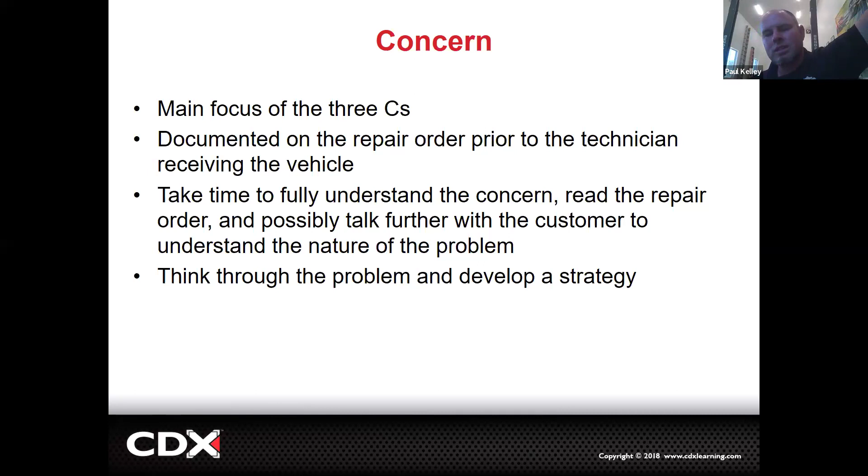And I'm sort of like, shoot, I don't know. So this was a cool perspective. Toyota wants to know what caused the part to fail so they can take it up with Denso so that Denso can pay the claim. Denso pays Toyota, Toyota pays the dealer, pays you. So there's a level of cause that's above and beyond what typically the technician does, right? Like the sensor failure - why did it fail? I have no idea, literally no idea. I'm not at that level personally, and professionally I was never at that level. My goal is to find out the cause of the concern. Someone's - and maybe you someday - I'd love if you surpass me.

Your job may be to determine the cause of the failure of the part, right? Above the average technician—cool, I want to add that one in there. It's fun though. And then the correction.

Toyota will a lot of times call this the remedy. So Toyota may say CCC, but they're probably going to say CCR, right? So this is how you corrected it, what you did. When you're documenting it, make sure it says the description of the test, expectations, results, procedure that was performed, right?

So right here, you're going to detail the repair. Remove the sensor, found this, installed the sensor. How did you verify the repair though? That should be under the correction as well. Check for codes—there were no codes. Road tested the vehicle 5 miles. Codes did not return, right? That would be a good close, that'd be a good 3C story. And that would all be on the repair order, and that gets logged.

And that's what we're doing in the second half, is talking about the Bureau of Automotive Repair, their side of things.

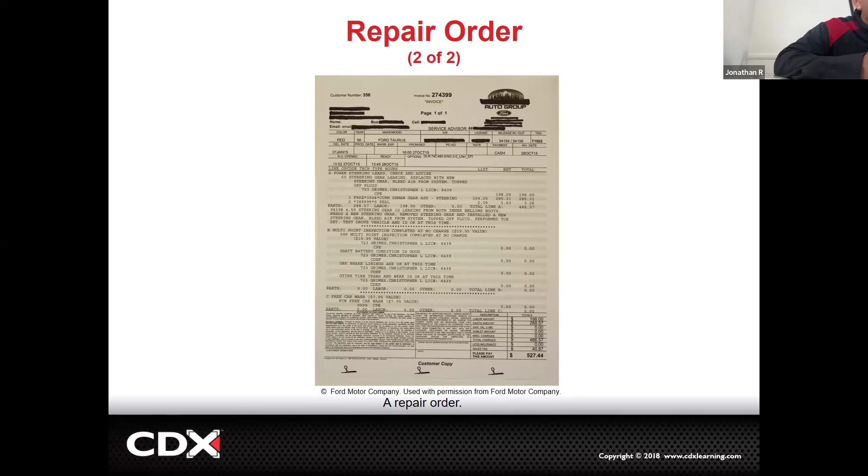Yeah, got it. Thank you. I have a question. So if there is a modified car that comes in, does the customer have to inform whoever is writing it? And then also, does the dealer charge more if it gets in the way of a certain job the technicians have to do, or how does that work?

Yeah, great question. I'm gonna give you a spectrum, right? So the first one: I got a student in his second year whose mom has a Subaru and dad has a Subaru. And he was saying, oh, my dad's Subaru is leaking at the valve cover. We brought it into Subaru and they said it's not covered anymore because he has a cold air intake. Now, did the cold air intake cause the valve cover leak? I don't know. Seems like a bit of a stretch.

But if they see a modified car, they do have the right to be like, you know what, we don't deal with this, we don't do modified cars. This car is no longer under warranty, we're not working on it. So that's option one, is just, if it's modified, just blow it out the door, not even going to touch the piece of crap. Dealer could do that. I personally wouldn't do that.

I'd more be like, well, I'm going to have you sign for your 1 hour diagnosis. I'm going to diagnose it. And then I'm going to show you whether or not the modifications cause the concern. So, second example: customer states the vehicle wears tires excessively, right?

If I look at a vehicle that wears tires excessively and I realize it's a Tacoma with a big old lift kit, I'd be like, hey, if your vehicle's wearing tires, it's probably because you modified the suspension. But you know what? Let me prove it. I'll put it up on the alignment rack and I'll show you all these numbers are all messed up. They're like, no, it's a defect with the Tacoma. And they'll be like, look at these numbers, all these alignment numbers are jacked up. You're going to have to pay that 1 hour diagnosis because this wasn't Toyota's fault. This is not a defect. This is a you thing.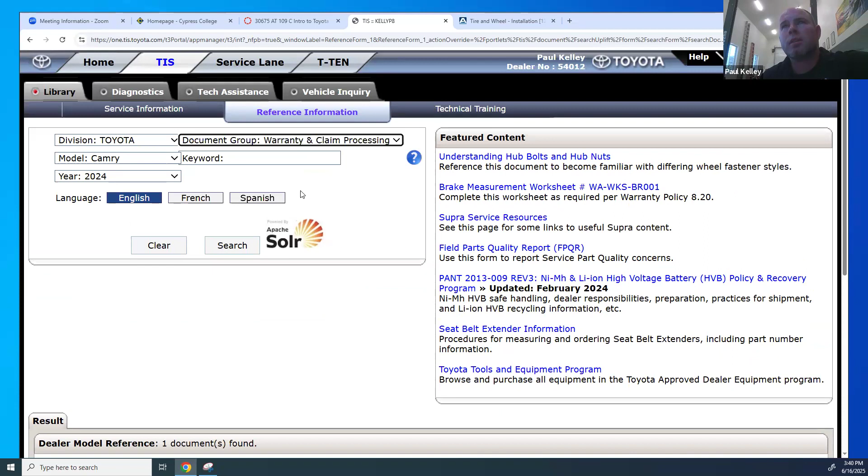Okay, you guys see right here, flat rate manual - that's going to give you labor times for what different jobs pay. Okay, so if I come up here and actually want to make this just a bit smaller.

Alright, let's say that... it froze. Yeah, he's frozen on my screen. Yeah, he's frozen on mine too. I think it's everyone, I think his internet died. What's going on? Yeah, I was like...

He may not know, so let me text him. Sometimes when you're doing it you don't realize that it froze. Yeah, he knows now.

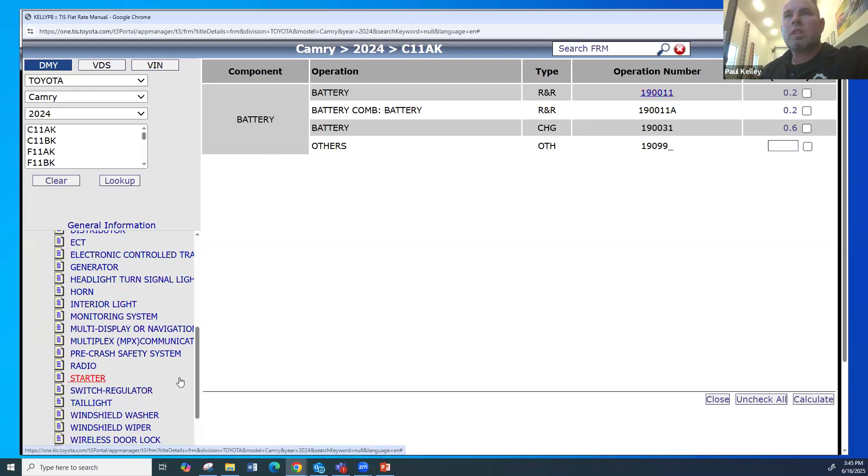Now maybe you can get some diagnosis, maybe not. So that tells you how much the job pays under warranty - this is all warranty stuff. Let's say you did a starter - a starter pays 0.4.

If you were to check a bigger one, how about repair, engine mechanical, a block? If you were to replace the block subassembly, that would literally be the rebuild - really, that's what it comes down to. If you're going to R&R a crankshaft, you're deep in there. That would pay 21.7 hours. The labor op is 111011. Makes sense. Plus you can add, if it has EGR and air conditioning, you can add 0.3 on 1.0.

Or let's say you were going to do a timing gear - pays 9.2 - and you could put in this operation code, 111051. So this is to give you, while you're in class, exercise in pulling your own op codes, but also practice for understanding how you're doing on your timeline.

So let's say, like that starter, you guys are going to do starters in your first semester. It paid 0.4 - they don't pay a lot, so if it takes you 2 hours, that means you're not doing it as fast as a professional technician who's got the experience, right? The other reason I really like to include this is, let's say we were to pick...

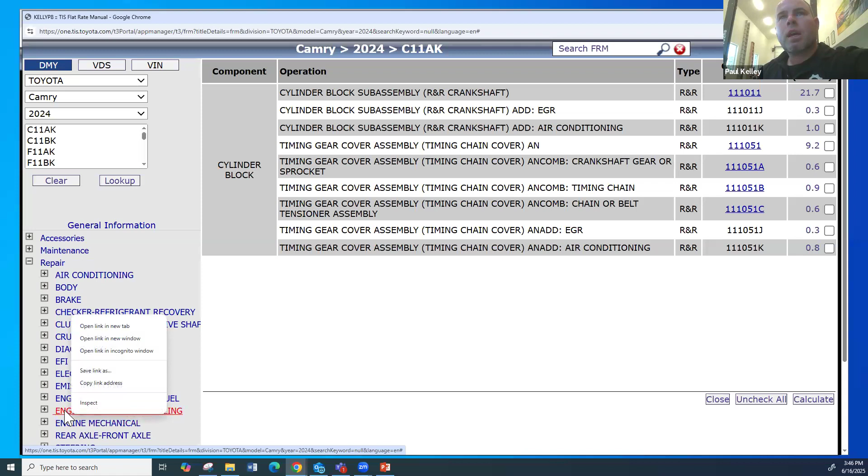How about lubrication cooling - how about the radiator fan, which I think will give us... and you can see it's not just the radiator fan, but it's in that area. Let's just say you're doing a radiator assembly - that would pay 2.3, right?

So if you guys come into class, in one of my classes, say it's air conditioning, we do radiators in air conditioning, we do condensers. But if you were to say, hey, I need a radiator in my car, can I do it? My answer is going to be, what's the labor time? And you'd be like, I don't know. So remember this, you're going to look it up in the flat rate manual. And if you come to me and say it's 2.3 hours, and I know we have 5 hours in class that day, I'm going to be more inclined to say yes.

Make sense? However, if you come to me and say, I heard we're doing - well, the water pump's probably not bad on this one - let's go with, in engines, you want to do an oil pump. I'm going to say, what's the labor time? And you're going to say it's 12.7 plus 0.3 plus 1.0. And the class for engines is 10 hours long. What do you think I'm going to tell you?

There's no chance you're going to get that job done in time, right? So sometimes when we get ready to do this work, it's doing your homework, doing your research, looking up your labor times. Now, these are all warranty labor times. If we jump back onto ALLDATA and you were to look up what that would be if Toyota wasn't paying the bill, if the customer was paying the bill - customer pay - it's probably going to be 50% more.

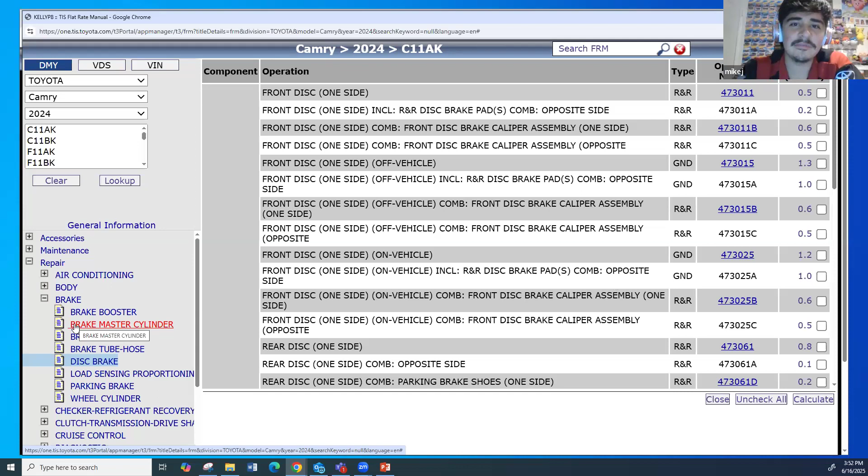It's pretty self-explanatory. I have a question, but it's not specifically for this—it's about this whole TIS program. How far back does information go? Like how many models, how old are these cars? I know Toyota's been around for a while, but I want to see how old these go back. Because one time, before I even got into this, I was working at a shop and I got an old Toyota.

Toyota Crown, I think, something super old. We didn't even know how to charge him because we spent most of our time finding his parts. Yeah, exactly, and that makes it tough.

Land Cruiser's been around for a while. Let's see. Well, I actually didn't want reference info—I should have jumped onto this page. I don't know the answer, but I'll try to find that out right now. It goes back a while. Where was that—Land Cruiser.

I need to change the year. 79. Land Cruiser. Yeah, there's really not much on there. It could go back maybe potentially this far, but it's a bit of a guess. I'm going to pick 79 again. If you go to the manual, you can go back quite a while, but the older you go—let's just say something I know is in there, I think we could probably have a Land Cruiser—but it might not be, maybe let's say it's an 88.

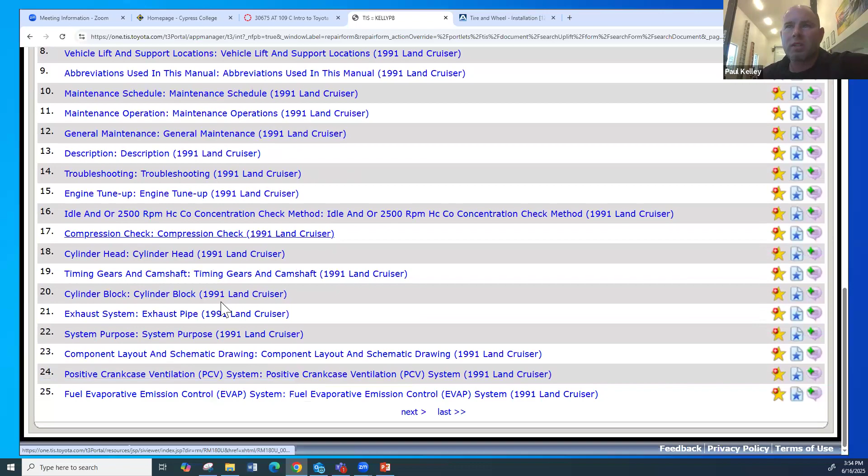I thought it was just because it was defaulting to service bulletins. Yeah, the thing about it is, here in '91, so somewhere around there, it's probably going to depend. I don't know that it goes back to just a specific year, but I don't see the Toyota Corona on there. Click on one of those, the Crown, like the heavy one—let's go with any of them. Engine tune-up. So what you're going to have here is basically the book as a PDF. It's not interactive. There are some blue links that will link to other pages, but it's not like the current repair manual information for a newer vehicle, where there are lots of links and hotspots to get you to what you need to know.

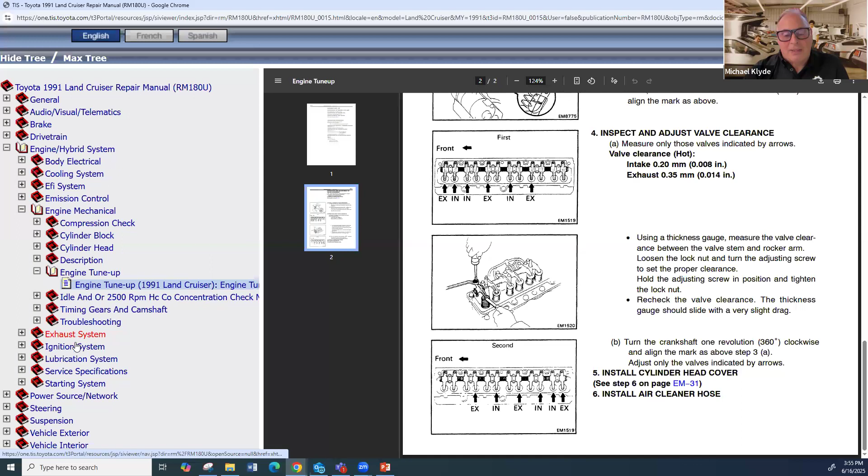So it's very much just like thumbing through a PDF. Yep, literally. Also, does this only have cars sold in America? Yes. Okay, I just want to know, doesn't really matter though. Yeah, so anything by TMNA supports the United States.

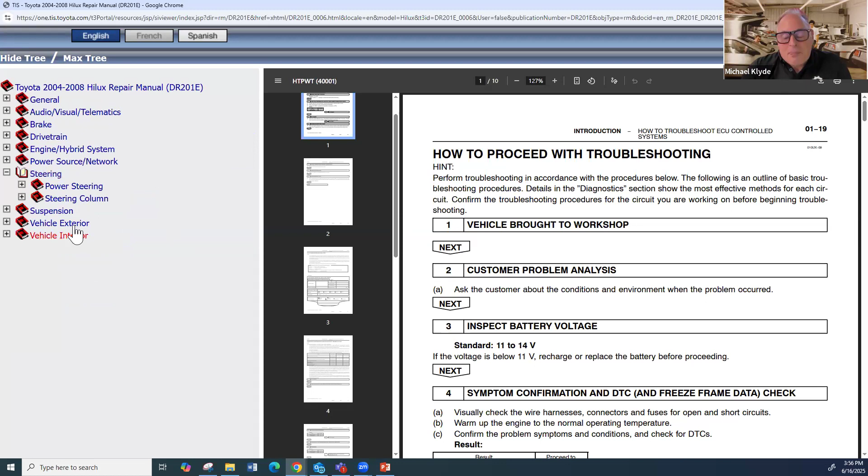So you don't do right-hand drive stuff in there? No, you're not going to have right-hand drive. There is some content created by Japan, which is why it says is it Mexico or is it US. They're not going to take that out, but anything in here is specifically geared to repairs in the United States. So if you're trying to bring in a right-hand drive vehicle, there might be some information you could cross-reference based on the engine type, but as far as the specific vehicle, no.

Yeah, there's not much. If you wanted to, I don't know why anybody would want to do it, but if you wanted to bring over a right-hand drive Corolla, you could, once they're 25 years old. But again, those are so old, they won't be in this material anyways.

So the book would have been published in the language it was sold in. So if it was from Japan, the service manual will be in Japanese, most likely. Yeah, it's paper. It looks like it's pretty tough to get anything on the Hilux for sure.

So I think overall you guys should be pretty rocking on the flat rate manual. It's not really crazy tough. A little bit later we do something on flat rates, so make sure you really, really understand it. If you don't have any questions specific to the FRM flat rate manual, we're ready to move on.

So you ready? All right, next thing on the agenda is Write It Right. You have access to this. It's very similar material in your Canvas. You have a PDF, but this is a presentation from the California Bureau of Automotive Repair.

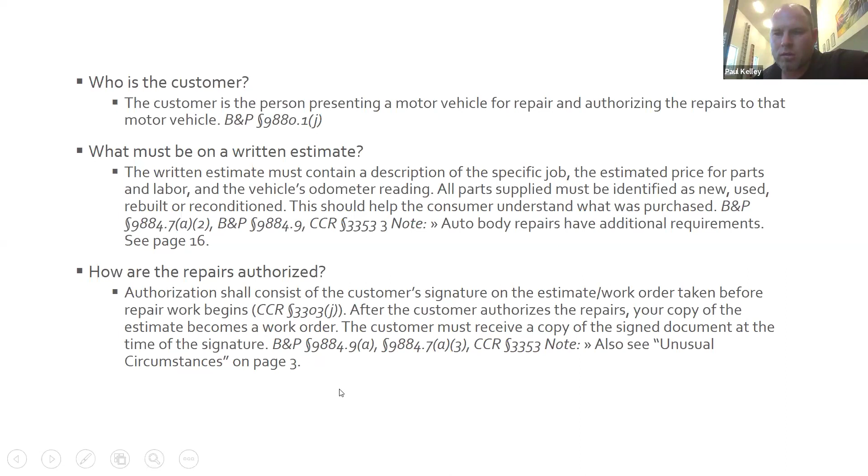Now, there are unusual circumstances, and we'll cover those. But in that estimate, does the estimate have to include the sales tax? The answer is no. Does the estimate price include toxic waste and disposal? Well, yes. For example, if we're doing oil or coolant or something, if disposal of toxic waste is applicable to the vehicle being repaired, the fee charge must be itemized separately on the estimate. If you charge a fee, your Environmental Protection Agency identification number must be presented on your estimates and invoices.

So we have to show it, and it has to be separate. So they can't be like, oh, your bill's 100, oh but by the way, there's an extra $7 for hazardous waste oil. It has to be part of the estimate, has to be listed, it has to be itemized. Make sense? It's just to make it more clear, very clear.

Now, some unusuals, we got unusuals, believe me. Unusual would be any instances the customer cannot be present to sign the initial estimate or work order during normal business hours. For example, the customer may drop it off at the facility prior to or after business, so out of hours, or they might even have it towed in. So if they have it towed in and they don't catch a ride with the tow truck driver, they're probably not going to be there, right? So that happens. So how do we get their authorization?

Prepare a written estimate work order before any work is initiated, including any teardown. Contact the customer by phone, fax, email, and more recently, actually, text is approved, text is included now. Obtain the customer's authorization. Properly document the customer's authorization.

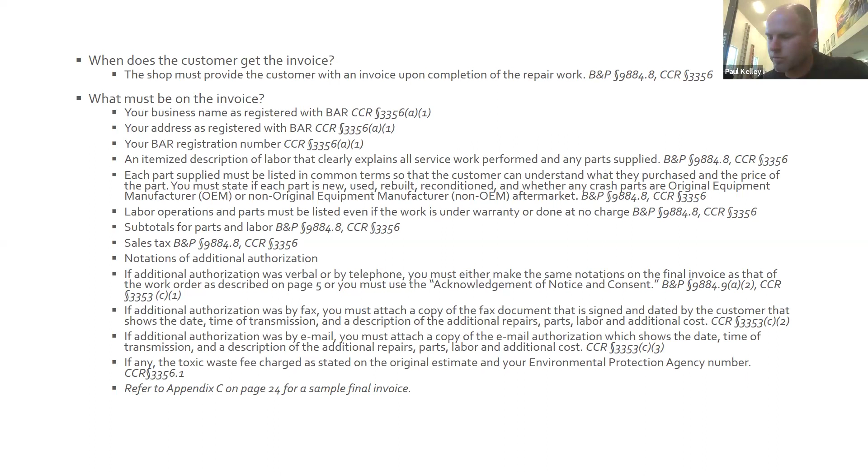And this is one that's not always real well followed. If a customer drops their car off for brakes, that can mean a lot of different things, right? If I say I did your brakes, what's that mean? I don't really know - see, that's what they're going after here. If you replace their front pads and resurface the rotors, that needs to be itemized: replaced front brake pads, resurfaced front rotors.

If you replaced front rotors and front pads and rear rotors and rear pads, that would all need to be listed. You need to be specific. You can't say, I did the brakes, replace the brakes. It's got to be very specific.

Each part supplied must be listed in common terms so the customer can understand what they purchased. So if you say, I got you a new engine, that would have to be a new engine. You can't be purposely misleading. If it's new, it's new. If it's used, it's used.

If you replaced an exhaust manifold, you can't just say fixed exhaust, or anything misleading. It has to be very clear what exact parts you used. Make sense?

This one's a little bit more collision related - actually, this applies to both. Each part you supplied must be listed in common terms so the customer can understand what they purchased and the price of that part. So we have to specify the price - new, used, rebuilt, reconditioned. And if it's crash parts, whether original equipment or non-OEM, in other words aftermarket.

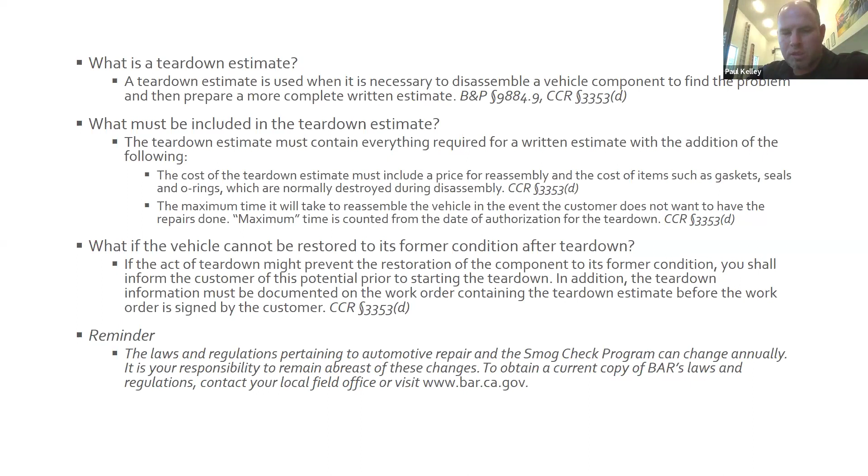Now remember, the laws and regulations pertaining to automotive repair and the smog check program change annually. So anything that changes, it's the shop's responsibility. It's not the customer, it's not the consumer, it's the shop's responsibility to know what changes when it changes. Like I added the fact that you can get a text authorization. That's okay, you're supposed to print them, but that's kind of hard to do.

Okay, and then let's say after you do the teardown, you need to provide that second or supplemental estimate. So after inspection, diagnosis, teardown, whatever it is, prepare a written estimate on the price for that specific job, itemizing all parts and labor required for the repair. Contact the customer for authorization.

Authorization is obtained the same way when the first authorization occurred - you can do it by phone, in person, etc. Now, do you have to follow the itemized work order exactly? Yes. So this is my example for that. Let's say, oh yeah, we're going to rebuild your engine. Then you get in there, you gave them a price for the engine, the parts, the labor you said you're going to need - 4 pistons, 4 sets of rings, these bearings, these gaskets, whatever.

Let's say you start doing the work because they approve it, and then you're like, you know what, I changed my mind, I'm just going to do the gaskets, I'm not going to do the full rebuild. You can't do that. You can't just be like, you know what, I'm going to do something different. Whatever the customer agreed to is what you have to do.

If you get into it and you're like, I'm not going to do pistons and rings and bearings, I'm just going to do gaskets - stop, call the customer, get a new estimate going saying, hey, we're not going to do bearings and rings and stuff, we're just going to do gaskets, this is the new price. Then you're good, but you can't just change it.

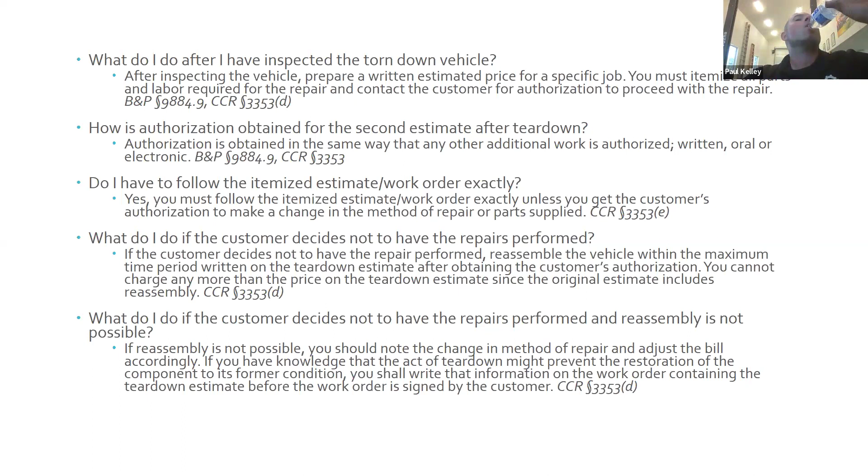And if they don't like the answer, then that's something you guys would be able to work out, the customer and the shop. The customer may say, well, I need it done today. And they may say, well, look, we got this much time into it, it's going to take us this much to finish it or whatever. But communication is what they're demanding there, really.

Okay, pretty good. And then there's your estimate. This one's a little tough to read, but generally I want to give you an overview because you guys are going to have an assignment to make one of these up. It's a repair order, but really it's more the invoice. Okay, so if we back up, here's your initial estimate.

I'm going to read the words because I know you can't see them. It's got your automotive repair, your name, your license, your address, your phone number, all that type of stuff. Customer information, vehicle info, the odometer, the license plate, the VIN number, information about the engine, an invoice number and date, right? But the odometer is a pretty critical one too. And then it's got some contact info.

And then the first line is: malfunction indicator lamp is on, no drivability concerns noted by the customer. Road test, retrieve DTCs, diagnose the cause and provide repair recommendation. All right, so this is the initial estimate. Basically it's saying the customer, John Doe, with this 2000 Wrangler, dropped it off. They're like, hey, why is my check engine light on?

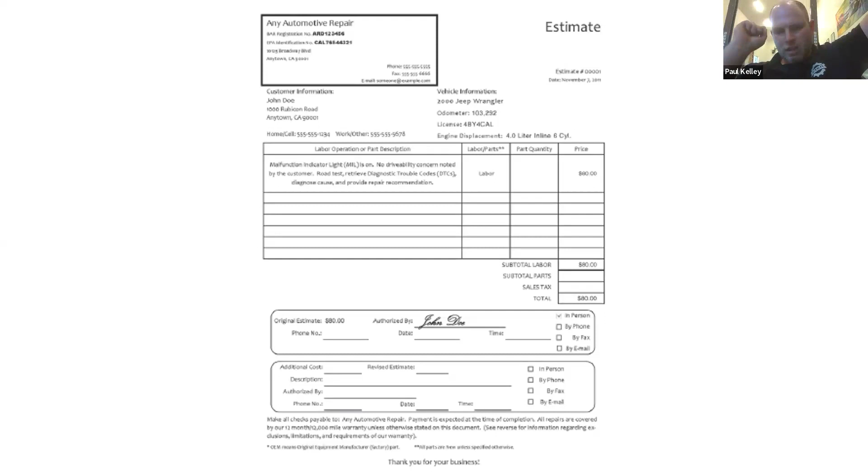The shop's saying, we don't know, we got to diagnose it. And he's like, well, I want to know what's wrong with it, that's all, I don't want you to fix it, I just want to diagnose. Cool, no problem, here's your estimate for the diagnosis. And the customer will be like, $80, I'm not going to do that, $80, I can get it diagnosed at AutoZone or whatever, go get in the zone and stuff.

But this is legit. This is sample provided by Bureau of Automotive Repair saying, no, we're good with you charging for diagnosis because we know it's going to take time. It's going to take the technician time to do that strategy-based diagnosis. By all means, charge for it, but you got to give them an estimate for the diagnosis. And that was $80, and the customer signed, and then we're chilling.

Then we go ahead, and what we did was road tested the vehicle, verified MIL is on, malfunction indicator lamp, no drivability concerns, retrieved DTC P0131, low oxygen sensor voltage, observed the freeze frame data and performed test of oxygen sensor circuit per the factory service manual, found upstream O2 sensor faulty, recommended replacement of oxygen sensor, and then to clear DTCs and road test to verify the repair.

The customer's going to be like, how much? And then you'd say, well, you were at 80.

We're going to do another estimate: 80 in labor, and the part is $60 plus tax. They ask, well, how much is that? Well, it's going to be $224.95. And they'd say, yeah, sure. When they say that, you'd write down right here: additional cost was $144 over the 80 they agreed to, a total of $224. You're going to do the description, saying you talked with them by phone. There's a little check box, check it off: talked to them by phone.